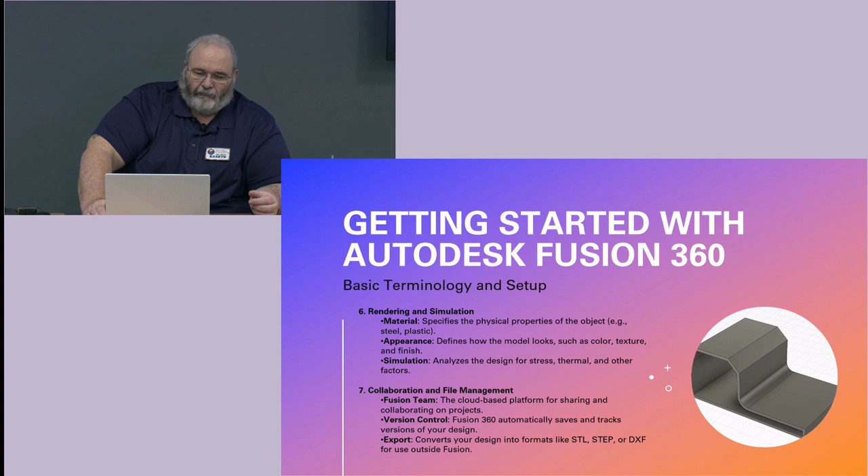Rendering and simulation, the nice thing is you can simulate different materials with Fusion and a lot of different things. You can change materials, colors, features within it. They have specific physical properties of the object for manufacturing and modeling and testing within the software.

With simulation, it'll go through and automatically analyze the design for stress, thermal, and other factors. If you have high movement parts with a friction fit, it'll give you thermal imaging of what can be done. That would be covered in an advanced class of Fusion, but it is all stuff that's possible.

Collaboration and management, Fusion team, cloud-based platform and collaboration on projects. Version control, Fusion 360 automatically saves and tracks versions of your design. That's another nice feature - if you're designing something and you lose connection or your computer goes down, it automatically saves files in a recovery folder for you.

If you open up and there was something open and it's not there, 9 out of 10 times you can go to the recovery folder and it's in there. It might be 1 or 2 steps back from what you thought you were at, but you don't lose a lot of your work, which is a good thing with cloud-based software, but also a bad thing at times.

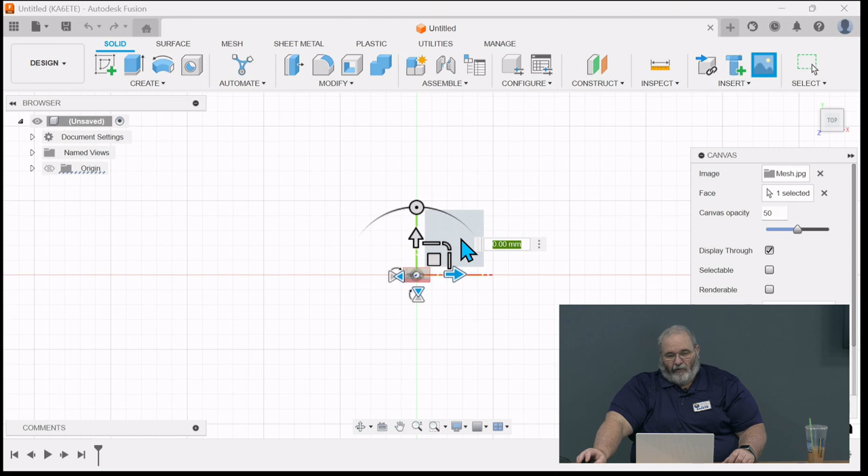A good general rule for a beginner is to always work from the top, so you familiarize yourself with what is the X plane, Y and Z plane and everything. Always try to start from the same place until you're familiar with it, then you can work from different planes a lot easier and seamlessly. So I'll select the top, and this will bring in the image, which will be a canvas.

One thing to remember, if you have half a part—say an antenna part broke and you have half of it but you want to design something simple—you can bring in an image of that part to trace the outline to get it very close to what you need, almost identical with the hole spacing.

If you do that, when you import a canvas or an image, always make sure you check the box that says selectable. If you do not check that box, it will not let you select it or scale the image to the correct size, which I'll show you here in a minute.

This image comes in a lot smaller than the actual size, which is why I always put a ruler. If I take a picture of something, I'll put a ruler next to it so I have something that gives me accurate measurements I can scale to. Seems like a horrible user interface to not make that the default, but what can I say?

The original intention was just to allow you to put images on the side, like if you're making a design that's going to go on the side of something, or if you have an image that's going to be pressed into something, to be able to put that image on there.

So I will select that, and click OK.

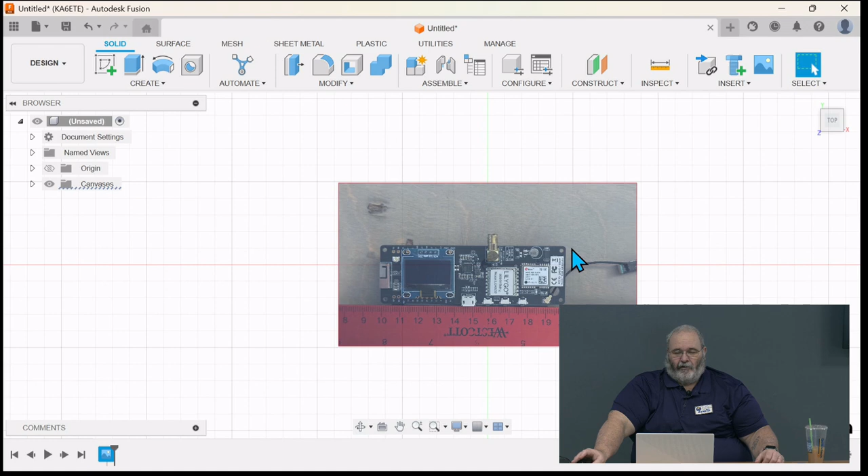Now that I have the image in there, I'll select the image and go to calibrate. Calibrate will allow you to scale the image.

Now if I zoom in on the image, you can see these are all in a metric system. So if I put the crosshair on the 15 centimeter mark and then on the 16 centimeter mark, you can see that when it imported it, it is showing 10 millimeters as 1.08 millimeters.

So then if I put in that that is a 10 millimeter measurement, it blows that image up to scale, giving me a scaled image. So whenever I draw lines and holes, they're going to be the exact same size as what is in the image.

Now that the image is in there, I'll start creating the sketch. The top left of the toolbar is always going to be your create sketch. When I click that, it'll ask me what plane I want to create my sketch on. Knowing that I selected the top plane, I'll select the top plane again to create the sketch on, so I'm looking directly down at that image.

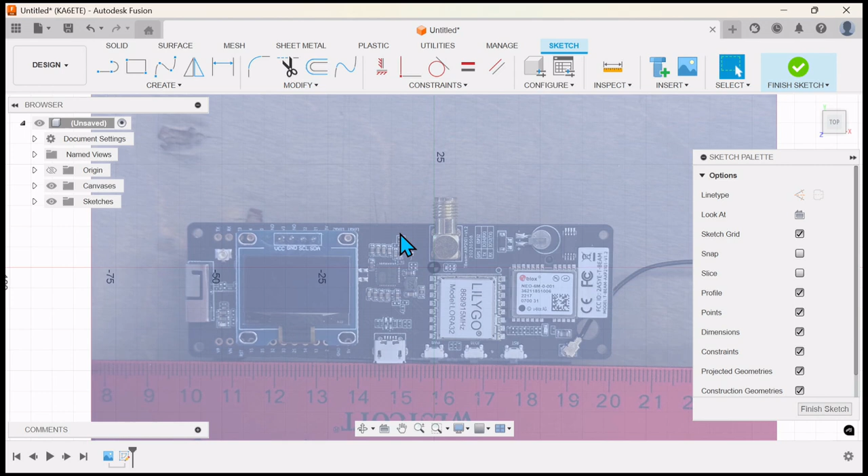So if I want to draw a line, everything you want is going to be at the top—line, rectangle, fit point spline, or mirror images. You can also select the drop-down create menu, which gives you a lot more options.

Some of these shortcut keys are standard between all installs, unless you go through and change them to custom shortcut keys. C is always going to be a center circle. L is always going to be a line. S is a shortcut key to get you to the search menu for selecting options. D is dimension, which we'll go into once we start drawing some lines.

If I go into create, I want to start creating some lines to outline this. I would always recommend going longer on your lines because you can trim off the excess, but you want to be able to do this.

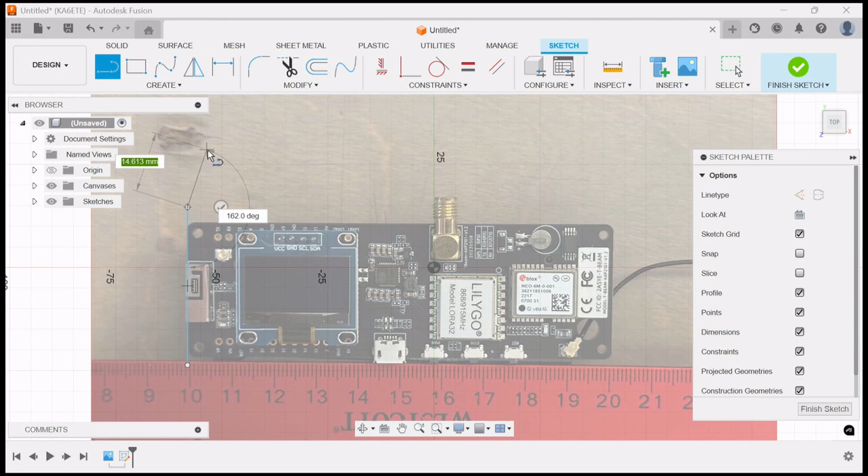So if I create a line there, the software will start creating the next line. But if you don't want to create the next line, just click the check mark, and it'll allow you to move without creating the next line. It tries creating a fixed point.

If I go down here at the bottom to get it close to that, I can start there and it'll draw past this line. The closer you're zoomed in, the more fine the movement is between it. It tries to snap it to a grid, but as you move in, it keeps making the grid smaller, so I can create a line there.

Or an easier way, I could have just created a rectangle around this, but we'll do it the hard way to go through stuff.

It looks to me like your image happens to align pretty nicely on that grid. Is that just a coincidence, or did you actually make sure that the image you started with is perfectly aligned with the axes? You can adjust it if needed.

I try and take them as square as possible with the camera. Whenever you take a picture to do something like this with, you want to make sure your picture is from directly above the image, as straight on as possible.

Yeah, the scanner works better. This picture was taken from my iPhone directly above it, which skews the image slightly, but it's good enough to where it allows you to make basic boxes and stuff. It gives you a basic outline to get within a 0.5 millimeter of what you need in the end, which if you oversize stuff for a little bit of growth and expansion, you should never make something exact size because you're going to need a little bit of wiggle room. As long as your holes line up, that's pretty much all that matters, but yes, the scanner does work better.

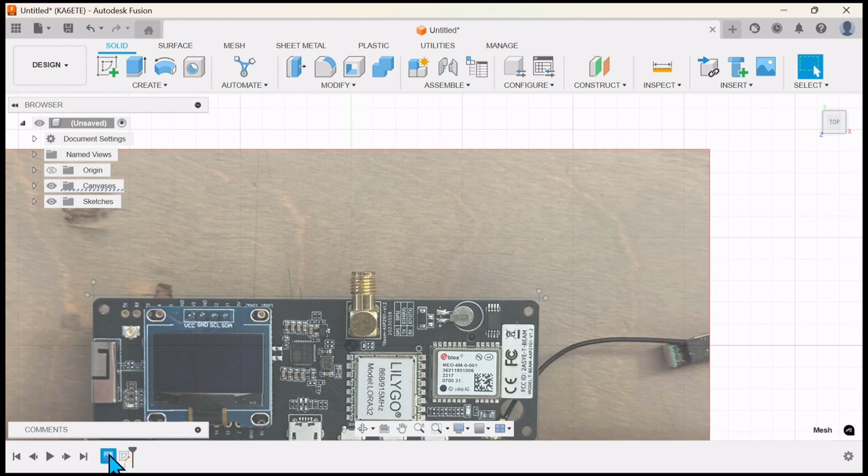But this is a good part to go back. If you look down here at the bottom of the screen, this is your timeline of features. If I go back, I can move that timeline back to where it won't show the sketch now—it'll only show the image that's there. And now if I go back to, come on, select that... that now brings the sketch back in.

Now another key feature good to remember is E is the shortcut for extrude. So if I want to extrude an object, I can select that and say, let me go up 10 millimeters on that.

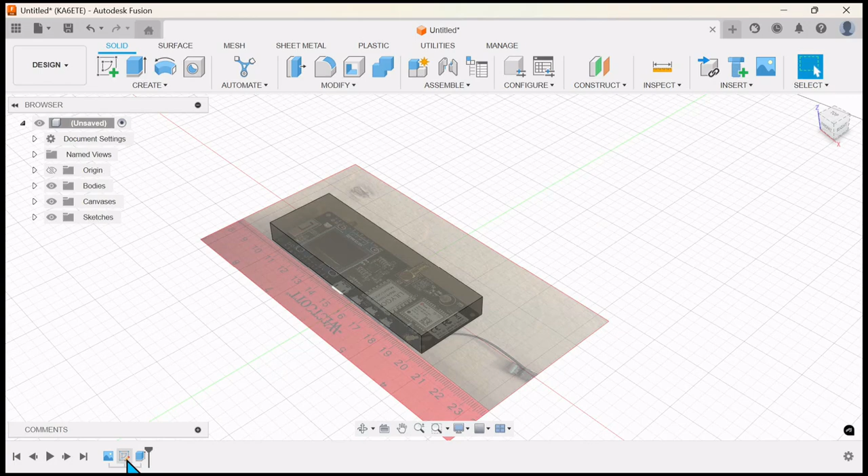Now if I go back to the timeline that I'm on right now, it shows that part extruded right there. But if I go back to the sketch, I can edit it, and it'll go back in the timeline. Now if I change anything in this sketch, like select that line and move it down there, finish sketch—see how it automatically changes the size of that box.

So if I go back and change a feature in a sketch, the nice thing with parametric modeling is you can change a feature and it automatically changes down the road.

I mean, it's snapped to the grid at 90 degrees. Yes, you could have done it with a rectangle, but by doing it with lines, you've got to be careful. So when you make your box, is it 90 degrees, or is it just because you've got the snap on that it comes out that way? Because it didn't look like you were taking a lot of time when you placed the lines—it was just kind of at the edge.

Yeah, a lot of it—whenever dealing with stuff this small, you want to try and get it close to that perfect 90-degree angle, which isn't always going to happen, especially when you're tracing the outline of an object. If I go in and check the angles, one angle might be 90.2 degrees and another might be 88.9 degrees. That 1 degree difference isn't going to be the end of the world in the end design.

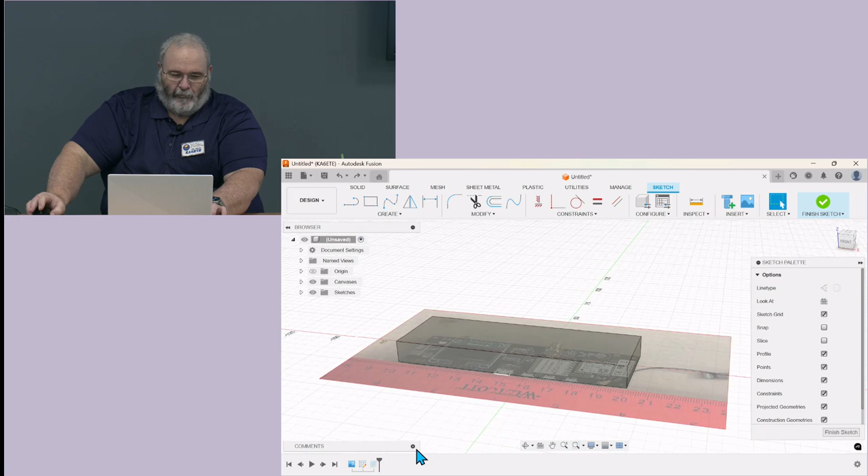Let me go back again to remove the extrusion. Now let me draw a circle here to show what I was doing earlier, and say I need to put a 3mm screw hole there. Remembering that D is dimension, which gives me my constraint, I can click that line and that line. Right now the center point is 2.5323 millimeters from the center of the circle to that right-hand side. Let me move that to 5mm—it automatically moves 5mm away from that line. I can do that one too, it's at 3.1, let me move that to 5mm also. So now I'm 5mm from there and there. But now that line moved, because I did not have that line constrained into the drawing.

So now if I try to extrude that, it won't let me because that's not constrained there, and now that's not a closed design, it's an open design. If I try to extrude here, the only thing it'll let me extrude is that center circle, because that's the only closed part. But I can select that and draw it out there. Now that's finished, and I can extrude that while leaving that hole there.

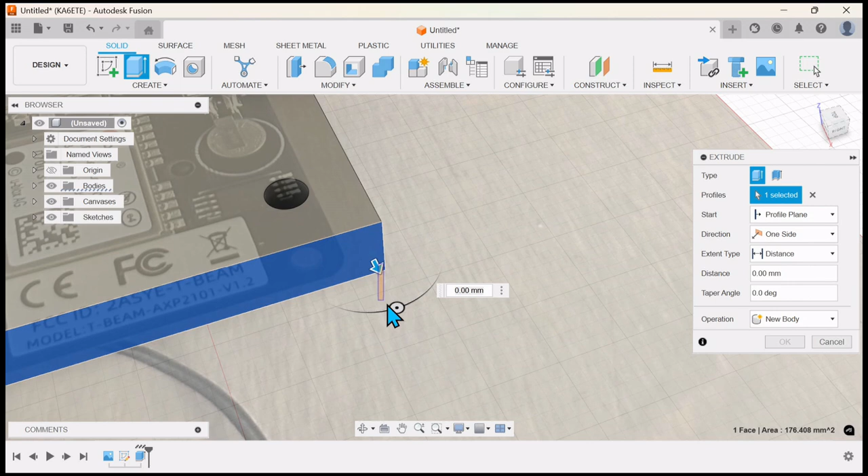Let me go 5mm on that—now you notice the hole's there. But now if I want to extrude this out further with that hole locked in right there... right now because that changed stuff, so I screwed that up. I should have had the box constrained. But it's all learning.

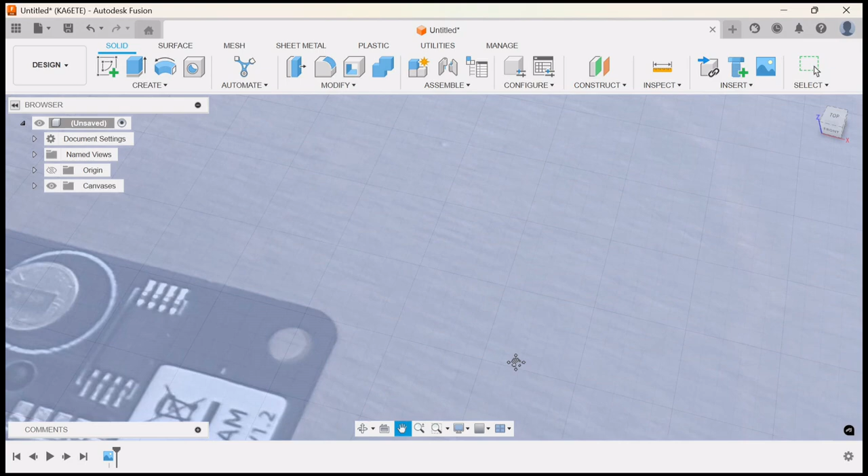Okay, that didn't have there. I'll just go back and start over, delete features, and redo this. I'll show you what Mark was talking about, using a rectangle instead of doing each line. Let me redo the sketch.

So now if I want to do a sketch, this shows different options. You can do a 2-point rectangle, a center-point rectangle, or a 3-point rectangle, which allows you to select 3 different points for where you want the rectangle to be. A lot of times I'll just do a standard 2-point rectangle—it's easy enough. I'd start at the bottom and then come up to figure that point at the top.

It gives me that dimension there, and if you notice, because of the shift with the camera image, you can see down here I'm right on the line, but up there it's slightly off. So that should have been slightly bigger than what I made it, but this side kind of makes up for it because it's shifted the other direction—which is another reason the scanner is optimal, because it takes direct measurements from a fixed point versus an image.

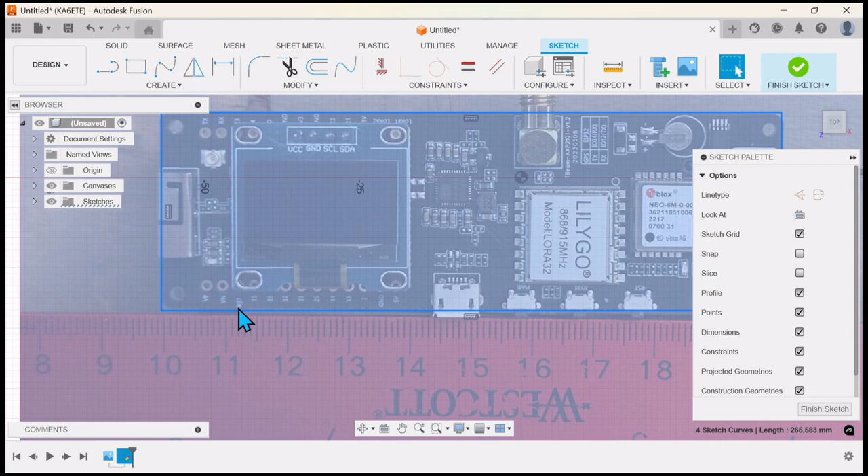Another thing to pay attention to: if you use a camera with an image and a ruler like this, make sure your ruler is at the same level as the portion you're going to be outlining. For example, if the ruler is up at the level of the circuit board, even though that's an inch off the surface, I had to lift the ruler up, because if I'd left the ruler an inch down, due to the skew difference, it would have looked like the circuit board portion was about 110 to 115 millimeters versus 100 millimeters.

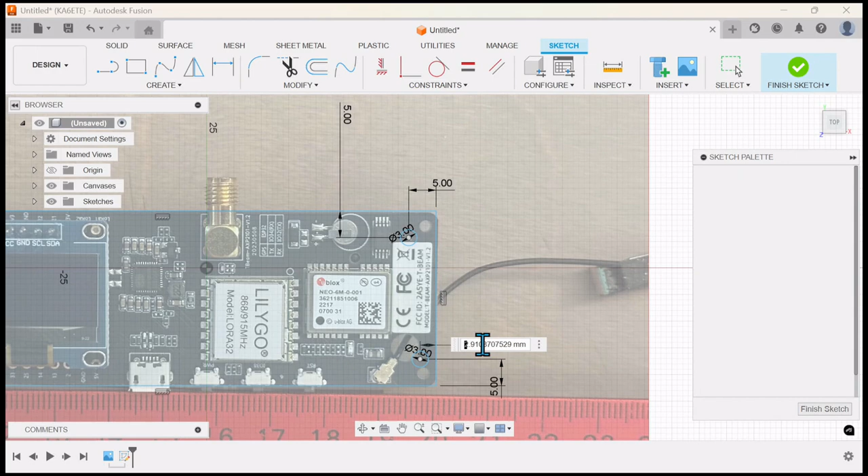Now if I go through and put a circle in here, dimension that from the side at 5 millimeters, even though it's not that, 5 millimeters is just a good round number to use. From the side and that side, I'll put another one down here.

And both of them are moved in from there. Now with them locked to each side, if I was to extrude this portion, you'll notice each one's perfectly spaced from the side. But if I move this, extrude this side out, notice only that hole is moving with it, not this one, because they're locked to separate sides.

So that would change the dimensions for the circuit board to fit on there.

So why aren't you on top of those holes? You've moved them in a little. I guess I would think if you're going to design something, you'd have the holes kind of match your part, or is this just for an example?

Yeah, I just did that to give it a little bit more room for demonstration, because those holes are actually 2.5 millimeter on center from the edge. It puts it close to a nice easy number for demonstration purposes. But normally you'd want to put the holes directly over the hole that's in the image that's there.

But because this hole was locked into these two dimensions between this side and this end, this hole moves with it, while this one stays in place because it's locked in from the other side.

Now, whenever I make something that I want to remain the same hole-wise, if I wanted the circuit board to be able to be mounted in there and all the holes move with each dimension, I would have initially constrained one hole to these two corners. Then the second hole, if I would have constrained it to this outside end and the center point of this hole, it will move along with that hole.

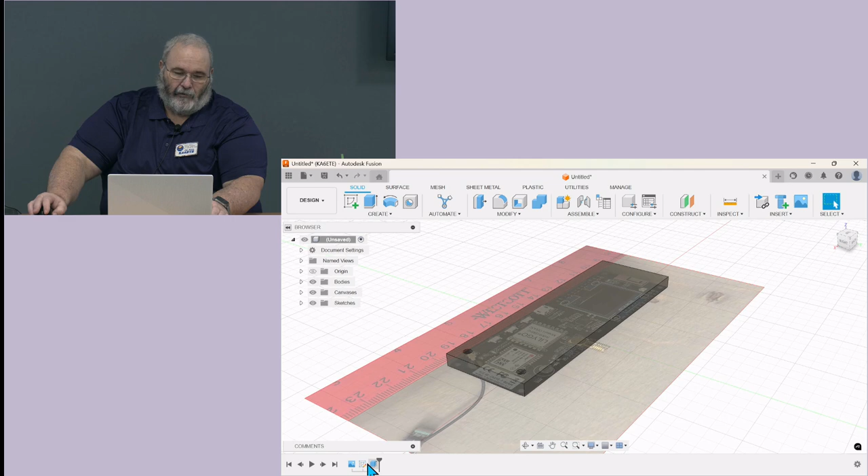To where now if I go back, cancel that, go back to edit my sketch. So now if you look, because see how they're dimensioned on different sides, if I remove that constraint, and now if I dimension that and go from there, from there to there.

Constrain that there. Now if I move this, do that same thing to this hole, now both of the holes are moving to where it'll stay there. So if I lock them together, if those were directly above the holes, I can move that entire circuit board along with it while having all this excess over there.

Or vice versa, I could do it to the other side, to where if I leave that there, now even if I move this wall dimension here, those holes are going to move and stay right there in that corner. But if I was to come over here and do that, the holes stay in place because they're constrained to that other corner.

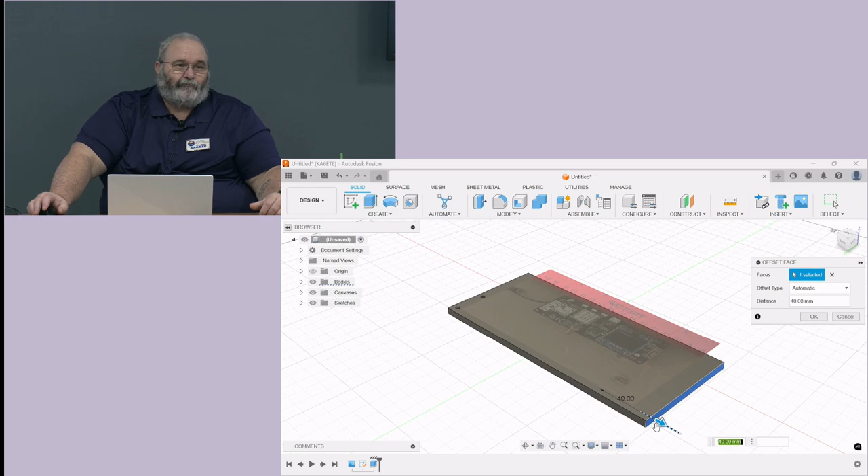So you went through this awfully fast. It's kind of like when I do Vim and somebody says, 'What did you just do?' And I say, I don't know, my fingers remembered what to do, but I couldn't explain it. Could you go over what exactly the series of keystrokes are that you used to enable the constraints? Yeah, that's my fault for knowing the shortcuts and remembering them.

I'll back out of that. Finish sketch, Control Z. Get back here. To do the constraints and stuff like that, let me move this up to where we can see it.

We'll make Mark happy because I'll put in the dimensions that I know these are. When I first drew the circle there, you can pretty much draw it anywhere. I know the dimensions on this circuit board, it's a 2.5 millimeter hole. So I can draw the hole anywhere I want and then constrain it after the fact.

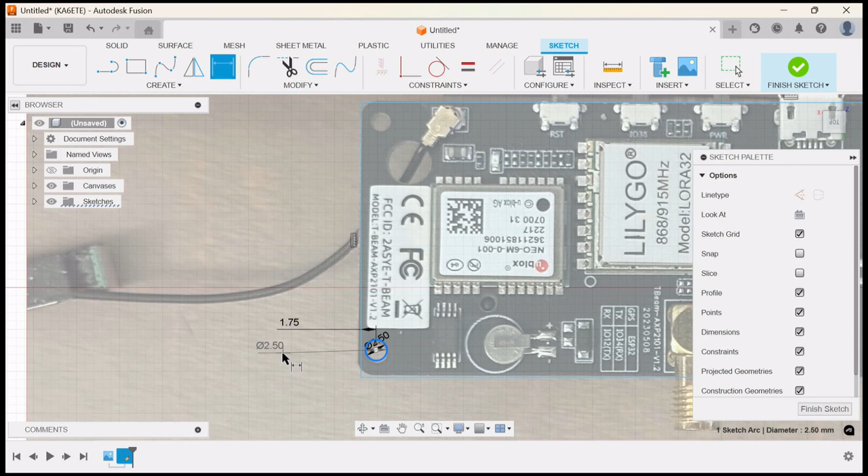If I want to lock it into the corner, I can select the circle again. I'm still in the dimension tool, which is quick key D or hotkey D. Select the other line that I want to constrain it to. Then with it hidden there, if I pull off to the side and click the mouse button again, it shows you the dimensions from that line. So then I can enter the 1.75 millimeters from that side. It automatically moves the line to that corner.

But because of the skewing of the image, you can see that it actually looks further away from the hole than it is. That's why it's always good to have backup measurements. If you're doing this, it will give you a rough estimate so you can look at it and say, okay, well, I have my SMA connector there, I've got to make sure I have an opening in the wall for the SMA connector. It's a good reference point for dimensioning stuff. It doesn't give you accuracy.

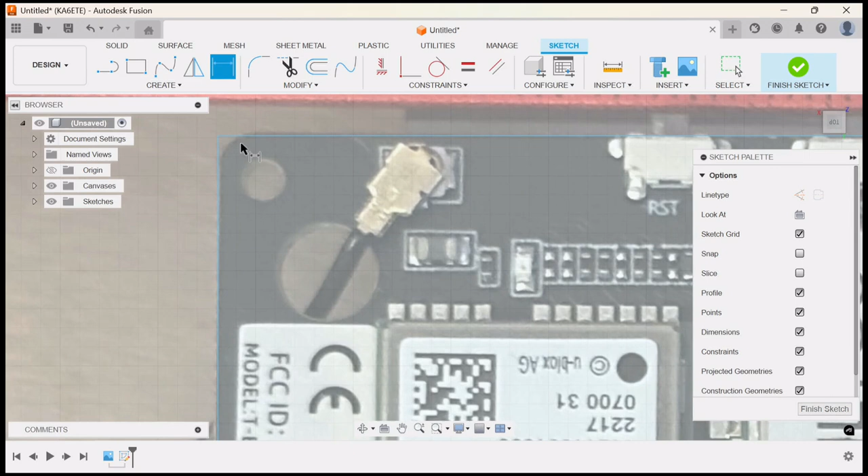It's just for reference to know what parts go where and what you need to allow for. So now that I know that circle's constrained there, if I want to add another circle up here in the top corner - when I'm moving in and out, it's just scrolling the mouse, and depending on where your cursor is, that changes the direction it zooms or moves away from the image. So if I scroll up there, now add another circle. As soon as I press C, it gives me a center diameter circle.

You can kind of do a copy and paste from the other one, but it's not copy and paste - it's move and copy. I'll show that here in a second. So if I do this, I'll enter the 2.5 millimeter circle there, constrain this one, and then we'll do the move and copy, and I'll show you how to do that.

So make it 2.5 millimeters, go back into dimensioning, and I want to leave this the same distance from this side over here as my first constraint, which is 1.75, so it keeps it the same as the other. Enter, and now I want to constrain this to the other hole so that stays the same dimension down the road. So if I go there, constrain that there, that ends up at whatever it ends up because of the dimensions of everything else. Don't change that unless you know the exact dimension it's supposed to be. Generally, I'm guessing that would be 28.7 millimeters - it's just due to accuracy and all the decimal places that we don't care about.

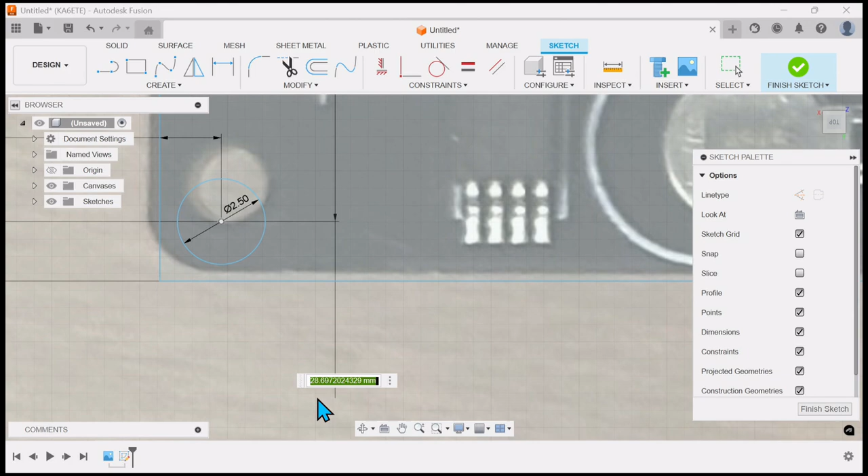So now I know that circle is locked there. Now to go from what Mark was saying about copy and move - if I highlight that one, let me get out of the dimensioning tool. Anytime you need to get out of a tool and just go to the cursor, escape key is the quick key, or you can go up to the top and hit select, which changes it to the standard cursor. So let me select that circle, and if I push shift, it'll allow me to select multiple features.

Now that I have both of them selected, I can right click on the mouse and do move copy. It'll pull up this other window, which is for moving the holes, but it wouldn't really allow me because they're constrained, so it will just leave them there and won't allow me to move them. But I can check the box to create a copy. Then if I go up to the arrows, which makes it nice and easy, it'll allow me to slide them over wherever I want.

What's nice is if I know the dimension that goes between that side and that side, I can enter the X distance, because that's moving those two circles or copying them along the X axis. So it'll allow me to do that, which I'm guessing is going to be negative 96, because that's the direction I'm moving - oh, not negative 96, so we'll do 95.5 millimeters.

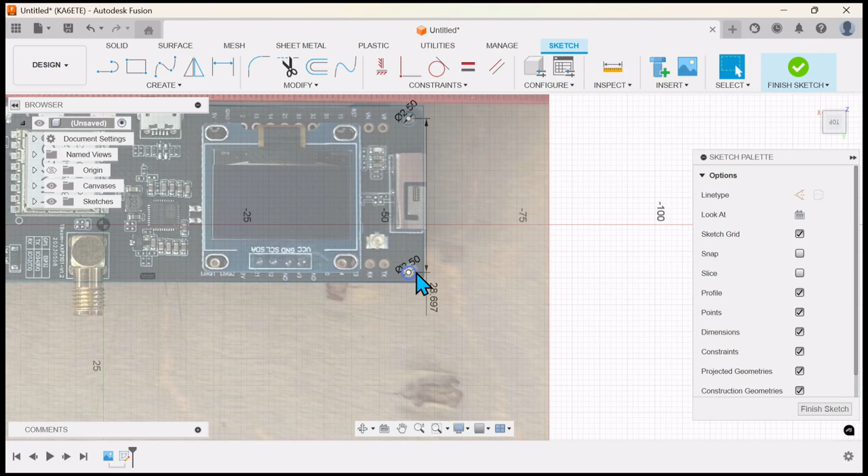Negative 95.5, that looks like it's really close to what I needed. Now knowing that is there, if you look, this hole is already constrained the distance from that hole.

Or that circle is constrained between there, so that's going to be locked in. But if I want to constrain this to that side, I would select dimension, and then constrain it to that circle, which gives me the 95.5. So that's constrained between that circle and that circle. To go one step further, I can still constrain that between there and there, which should automatically be at 1.75 because I just copied and moved it straight across the x-axis.

Now what's nice, if I finish the sketch and extrude that up 10 millimeters, it puts all of the holes directly above.

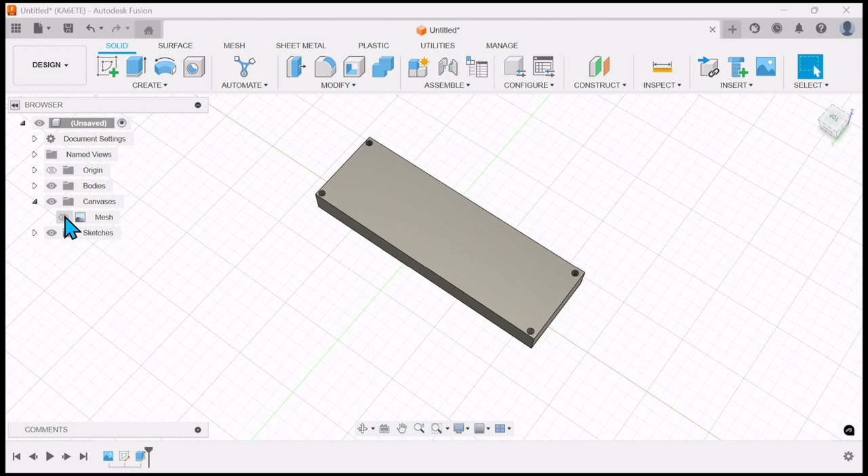If you ever want to change the opacity of the image behind it, once you're done with it, you can go over to the canvas on the left side, the toolbar object window, and hide it there if you want, or just change the opacity down at the bottom.

Or right click on the image, or go to the timeline window and right click on that, go to edit canvas opacity, cut that back to 25% so now it's not as prominent. Or if you want a solid image, move it to 100%. When I generally start the rough outline, I leave it at 50%, and then back it off as I move along to hide it in the background more.

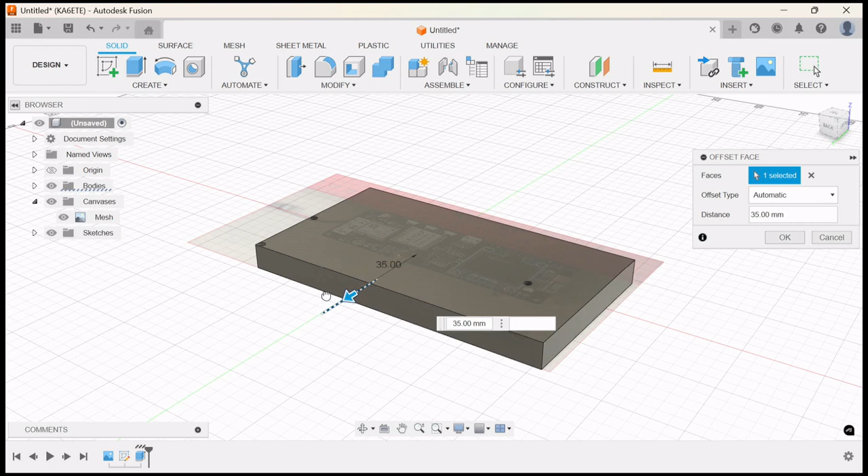Right now this is a solid piece, so if I go through and extrude that side, none of those holes move. I can change the dimensions on that side, and all 4 of the holes move, so no matter what, all those holes remain the exact same spacing, while I can change the location of the circuit board.

This gives me all this other room over here if I needed it, if I'm making something for one of the T-Beam circuit boards, and want to add other objects to a single enclosure with the T-Beam. You can put the layout for the T-Beam to mount on there, and then expand it so you have room to add another controller, like another ESP32 controller, or add room within the same structure for anything else, while not changing the dimensions for the mounting capability of the original object.

When you're starting out with this stuff, I was really tempted to go crazy with dimensions and constraints and make sure everything was locked in. But I think it's important to consider which dimensions actually matter, so you have this flexibility to change things later on. Because if you have 5 millimeters here, 28 millimeters here, 5 millimeters here, you can no longer change anything. Everything's locked in.

The basic features: if you're making something for a circuit board or one part, leave one primary object that you're constraining, and leave the rest open to the ability to change. Like this, I'm making a box for this controller, and I want to be able to add different things like a display. So I lock in where the controller or the circuit board is going, locking the mounting holes in for that.

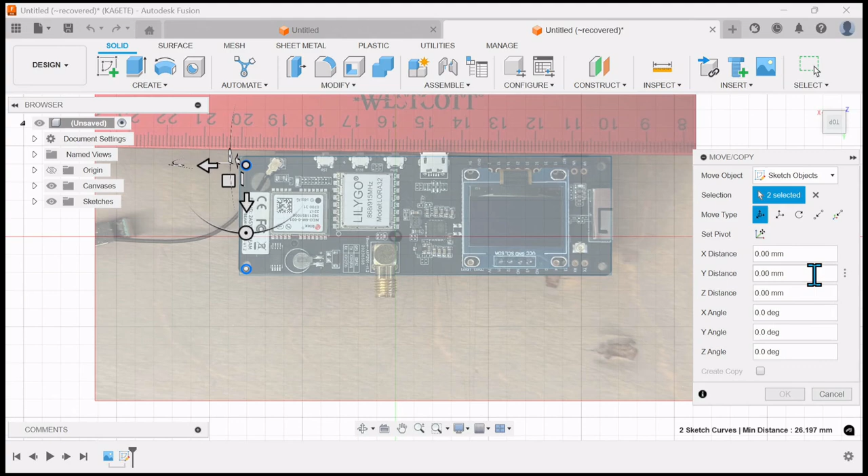People remember how we did that: shift key, select multiple, right click, move, copy. No, I don't want 3. Why did 2 get selected? What is going on here? Oh, that's why, I wasn't in the sketch, which is why it won't let me do that. Go back, edit sketch.

Copy. No, because I remembered what it was. I can just enter negative 95.5 millimeters and automatically move them the distance I want. Now reconstrain, make sure everything stays in the same spot.

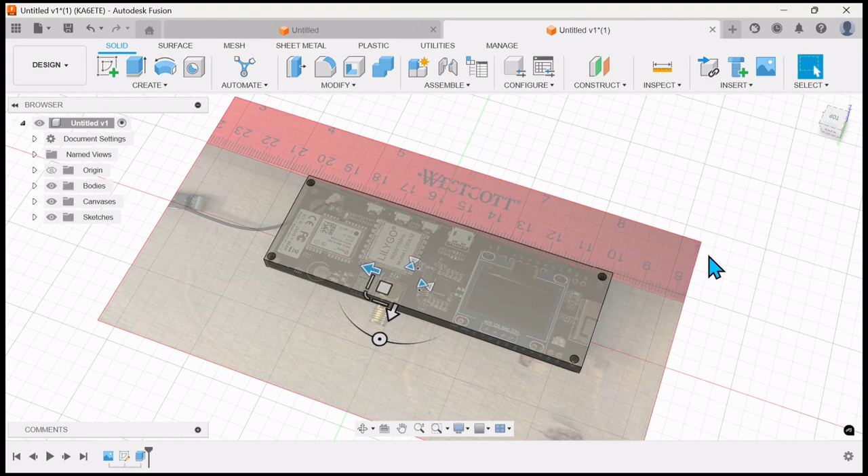Change the opacity of that back to where it was. So now that I have everything reconstrained and back where I was, I'm trying to remember what someone asked me during the break about a portion of it.

Now if I move this out to change that dimension, change this dimension here where all 4 holes come out. Now if I want to add something - a hole or an inset for another feature on this side, or if I just want to slightly change this to add standoffs for the circuit board to sit on top of these holes - if I want to add a new sketch on top of this feature, I highlight the feature and I can create a new sketch.

That means I'm sketching on top of that extrusion, so anything I add to it is going to be added to the top, not underneath it. So say if I wanted to add, because we know the holes on the circuit board were 2.5 millimeters, I want to add an offset to it so they sit up above the solid form underneath it.

I select the circle that I want, and you can either select at the top up here, offset, which will create your own offset, whatever size you want. Or if I hit the shortcut - this will give you another way to get to a lot of the features if you don't remember where they are - press S for sketch shortcuts or search. If it's not on the shortcuts up there, if I start typing offset, it automatically brings up standard offset, offset face, or offset plane. I just want a regular offset, so I select regular offset.

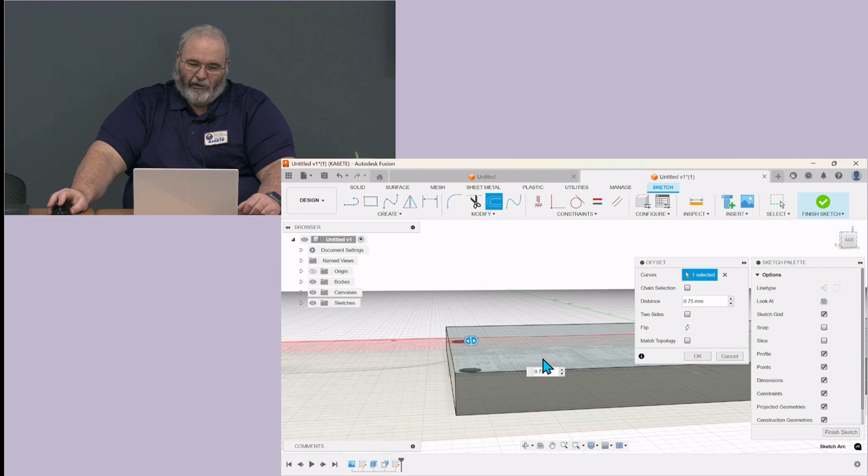I'll leave it at 0.75 millimeter and show you what it does. If you look at the offset, see how part of that feature is off of the side. I'll finish the sketch real quick, but if I select that, it only selects that portion of it because there's technically a line running through that, so it's giving you two separate closed features.

Or if I select that and go to extrude that, say I'll go up 3 millimeters, it automatically cuts it off right on the edge.

It's not going to allow it to go past that. Now if I go back and select that and extrude it, but I also want to extrude that 3 millimeters, it gives me the whole thing, but then it overhangs there.

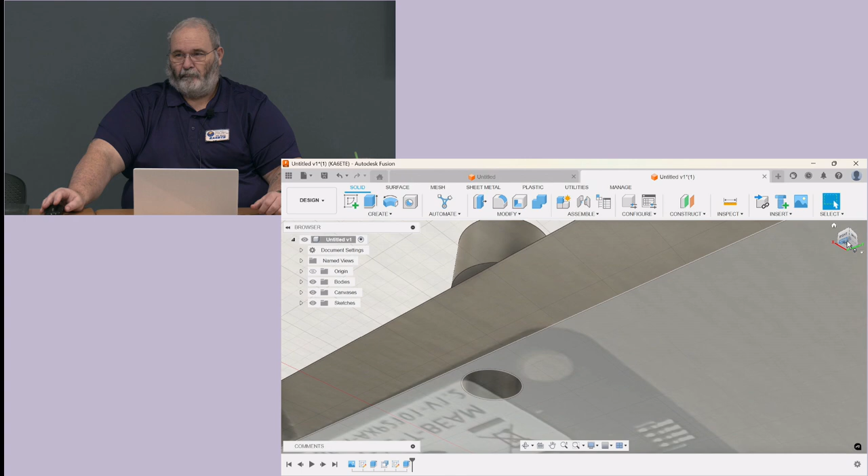If you do want to do that, there's ways you can add structural rigidity by adding a fillet to the underside of it. If you go to 3D print this, that's so small of an overhang that most 3D printers will do it without an issue. But if it was more like a 2 or 3 millimeter overhang, you can't print in free space. You can try as much as you want, but you're never going to do it.

They are working on ways you can do it with UV curing and laser curing with resins to print in free space, but I don't think any of us here have the money to have anything to do with that.

I'll leave that there for now. If I wanted to add a fillet to it, the quick key for that is F. Shocking, most of the quick keys are the first letter of what you want to do, with some exceptions, like S being the short key for the search menu instead of sketch, or the C key being circle instead of chamfer. But if I want to do a fillet on that, a 1 millimeter fillet's too much because that's only 0.25 millimeters of an overhang.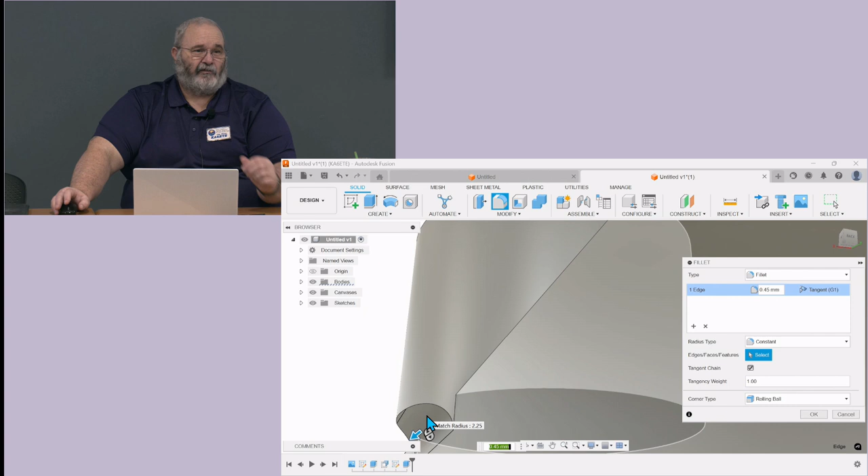So 0.45, that would be printable by any 3D printer without any type of support material, because you're starting off gradually tapering out to that. By the time you get out to this, that's less than a line width for your 3D printer, so you're going to be able to print that very easily.

I know my 3D printers are calibrated to where I can print a 65-degree overhang without any support structure, which most people try and average. You can get a 55-degree overhang without support material, you're on the upper side of things.

I'll go back and cancel that. I'm going to go back to draw the rest of the diameters around that. So I could do it multiple ways.

If I select offset to do an offset on everything, again quick key O, I can go through and select... no, offset won't let me do everything, but I know I'm just doing everything in 1 millimeter. Makes it quick because I can go through and select everything, press O, default is 1 millimeter. So just select it, press O, then offset or enter, automatically puts everything at 1 millimeter.

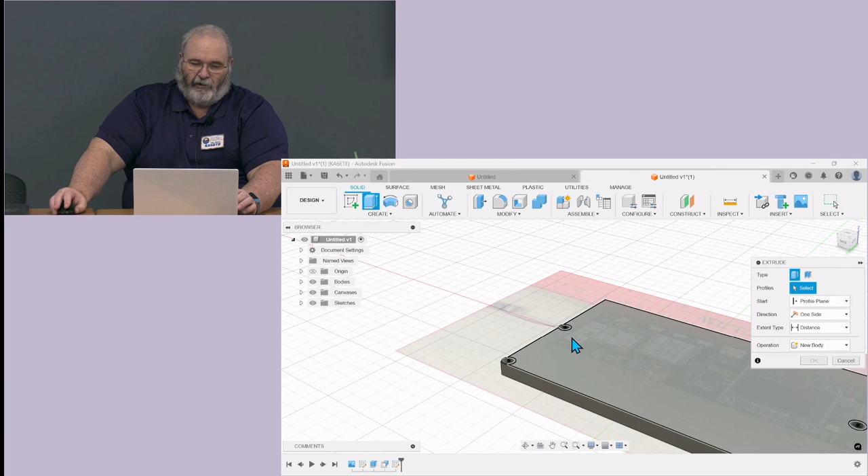Now if I want to extrude everything from that point to make these standoffs, it'll allow you to select multiple features simultaneously, and you can tell by each one remaining highlighted as a feature.

So each one's highlighted. These corners will show you, you can see how on both sides, the overhang is not going to extrude. If I wanted them to extrude, I could go through and select them individually. But because of the box, it's going to be inserted into something, I don't want them to extrude.

Extrude everything, don't need 5, so we'll go 3 millimeters. That puts everything up to where now the circuit board is going to sit on top of that and still have the bolt holes, or screw holes, for the screws to go through to mount it. While giving me the air gap underneath, whether it's for features underneath, solder through connectors, or heat sinks or anything mounted underneath, they're going to have an air gap for cooling purposes.

Now if I want to add to that feature, even though I extruded them, I can go back and edit that sketch by going down to the timeline, right clicking on the feature. The sketches are going to be highlighted by a box with what looks like a pencil for your sketches. Extrusions are going to be the blue rectangle with the arrow pointed up, defining extrusion.

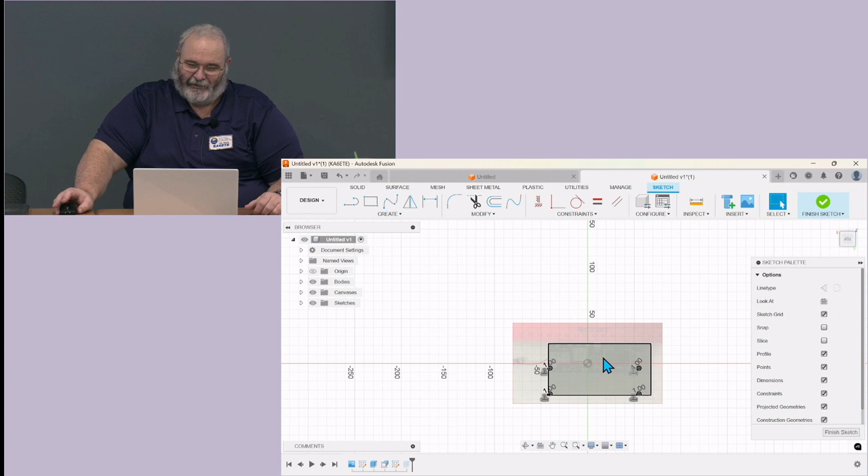The canvas is going to be the standard picture image that's been used since, I think, 1995, whenever you depict an image that's not there. Hasn't changed much. So now I can go through and edit the image.

Now anything I put on here, I'm going to put a rectangle on there. What's nice is if I start drawing a rectangle, you can see the dimension boxes. Say I need a 50 millimeter by 15 millimeter rectangle. I know the dimensions, so I can directly input them and it'll put it in there.

Say this is going to be for a small battery power supply for the circuit board, like an 18650 battery that's mounted there that I always want to be in the exact same spot from where that circuit board is mounted. You can constrain it there if you want, or just hope you don't change the dimensions that move the box.

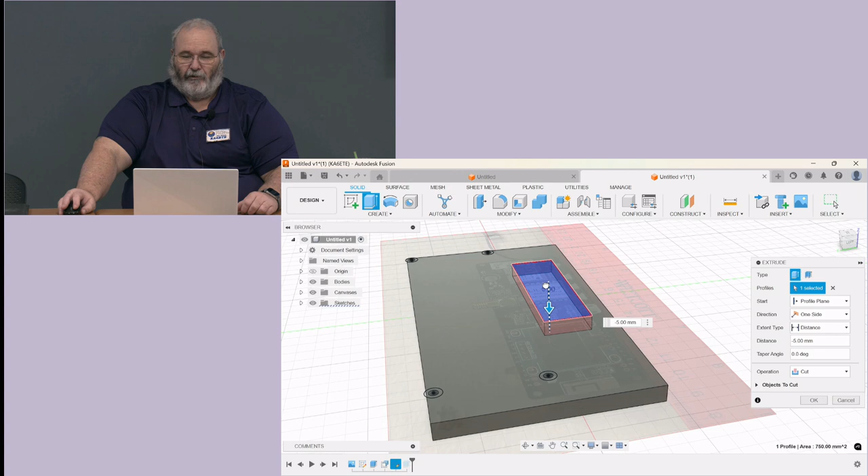Now with that extrusion there, if I select it, I can go up to make it higher, or if I go to a negative number, it'll cut into the box below it. Or say if I go negative 5 millimeters, that puts a nice indent for a battery. If you have a battery box, it's going to sit there, so keep it from sliding around.

Now with that box not being constrained, if I go to move that, oh, now everything is tied to that spot because I made a new drawing on top of that. So it won't let you go back. So now that I added features on top of that, it doesn't let you move stuff underneath it.

Now everything is exactly where it's supposed to be. I can move features to the sides, add more room here. If I want to make that bigger, to add another display section.

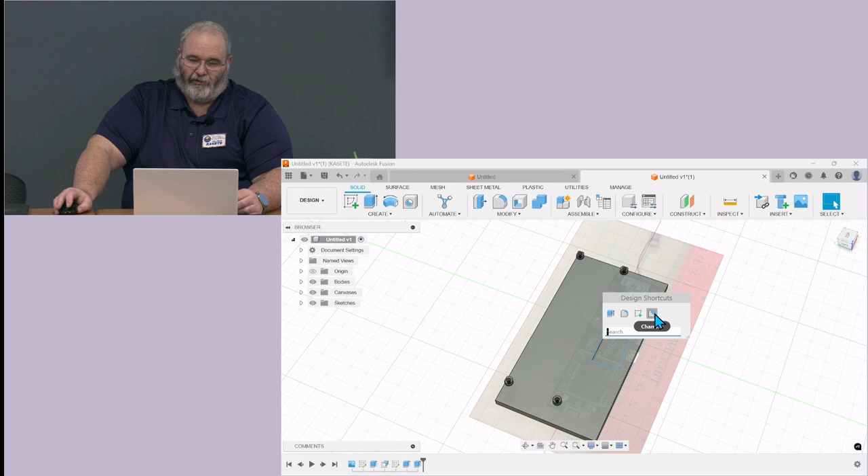The key to be able to do it efficiently and quickly is to learn the hotkeys for stuff. That will be the biggest aspect to help you. With the S key as a shortcut, you can add stuff into this, and you can take stuff out of this. Like right now, it has the chamfer, create sketch, fillet, and extrude.

If I wanted to add the offset feature up there, it's a quick button. If you look here, if I start typing offset and press the up arrow next to it, it adds offset to that list. So it's a quick way to make a short list of features that you use a lot instead of having to go up here, go to modify, shell, draft, whatever you use the most.

Now if I was to do this, let me create a new sketch. I'll go over here, hide that body, hide the canvas so that's out of the way. Hide the sketch, just to start new and fresh without opening up a new thing.

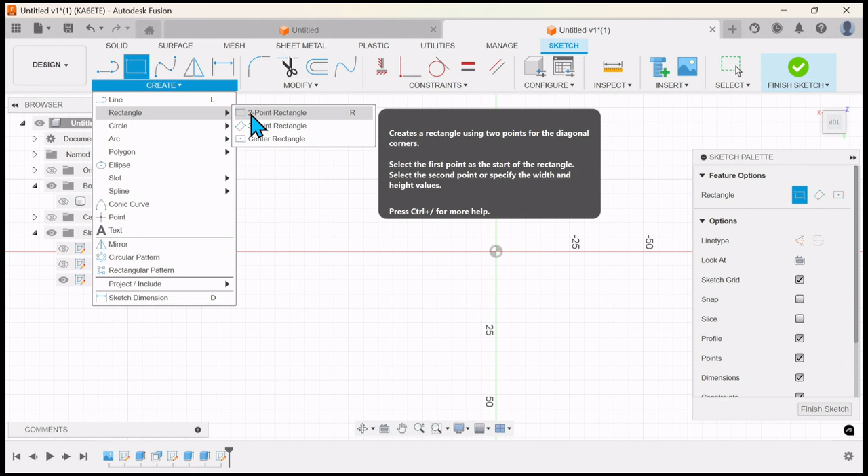If I want to create a box that's constrained in to the center of all three axes, I go to center point rectangle. It automatically pulls out from the center point where I can do a 50 millimeter by 50 millimeter box. Extrude that 50 millimeters.

Now we have a perfect cube, but I want to make it a shell to where it'll only have 5 sides. If I select that and select shell, this is asking me one face selected, the inside thickness, asking you what you want the shell thickness to be.

It's just moving it inside. If I want it to move outside, I can select 1 millimeter. That'll move the 1 millimeter wall thickness to the outside dimension, leaving it a perfect 50 millimeter by 50 millimeter cube inside. If I move it to the inside, you're going to end up 48 millimeter by 49 millimeter because you're removing one of the faces, so it's not going to be a perfect cube.

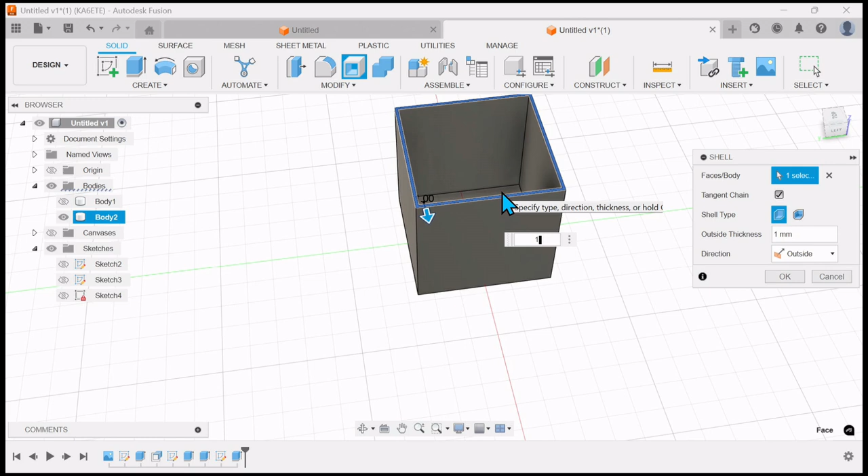You can also move it both directions to where it makes it a 2 millimeter wide shell thickness, but you're moving 1 millimeter inside, 1 millimeter outside.

Which, if you're making small cases to slide stuff into, say you're putting a piece of test equipment in and you have a nice box that it sits in, foam in the box, but you want a hard shell to slide over top of it for transporting. Making a shell with a thickness of 2 millimeters is going to give you a nice hard structural surface. If you throw it in your backpack or tool bag, it's not going to get damaged on the inside of that box. It's protected by the foam or whatever it's setting into, along with the hard structure around it.

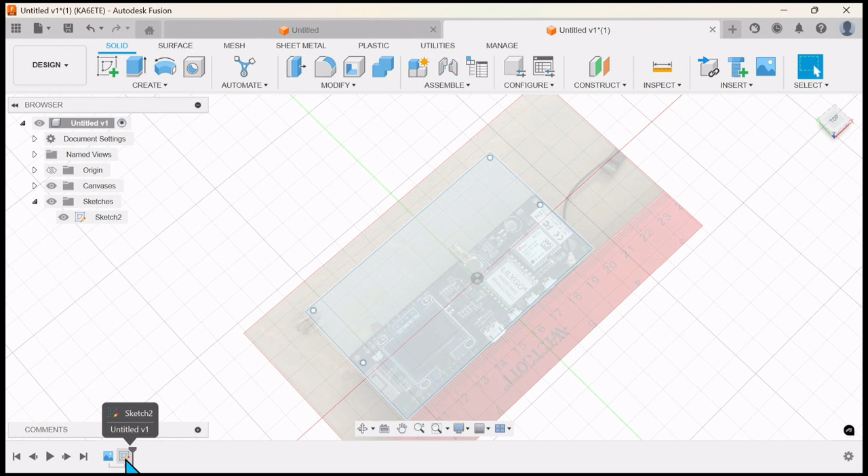For that Meshtastic design you were working on, if you need to make a hole for that SMA connector to go through the side of the box—you haven't added sides yet—how would you go about making sure that SMA connector is a nice tight fit, but still aligns with all the screw holes? It looked like you were playing a little loose and fast with the actual placement of the board on the sketch. So once you get to that SMA, how are you going to make sure it's still a snug fit so that you can mount the board?

Okay, let's add some sides to the box real quick, just to make it a little bit easier. Here's an easy way to add sides if I want to do all sides the same.

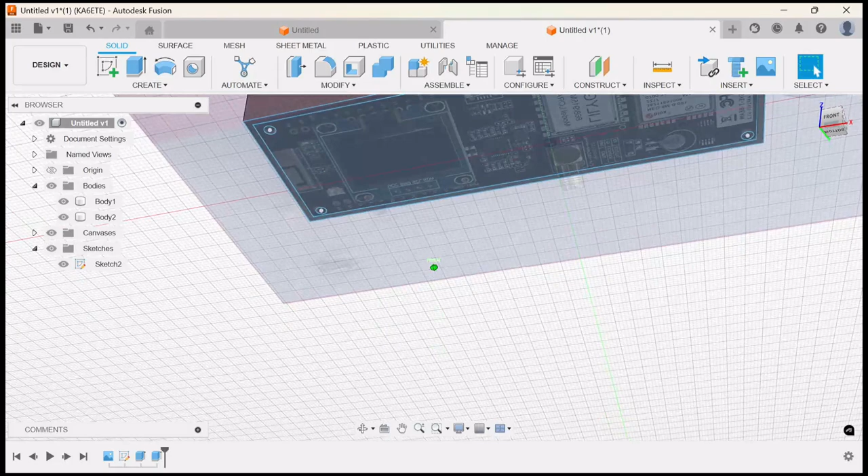Offset. Now if I'm editing the sketch, I can offset it. We'll do 1.5 millimeter sides to the outside on the offset. And now if I go to extrude—because I know the original box went up 3 millimeters—we'll say 10 millimeters there. And the sketch is finished. Now we know that everything is done there.

Because of opacity levels, you can still see through everything, and knowing that the SMA connector goes right there, I can zoom in and see that goes right there.

I don't have the exact dimensions, so otherwise I would measure. If I had the part in front of me, I could use a caliper and measure how far over the part needs to go. But because we're going to be guessing on where the SMA connector comes out—not really guessing, because we have an image—we're going to be close. But I'll need to...

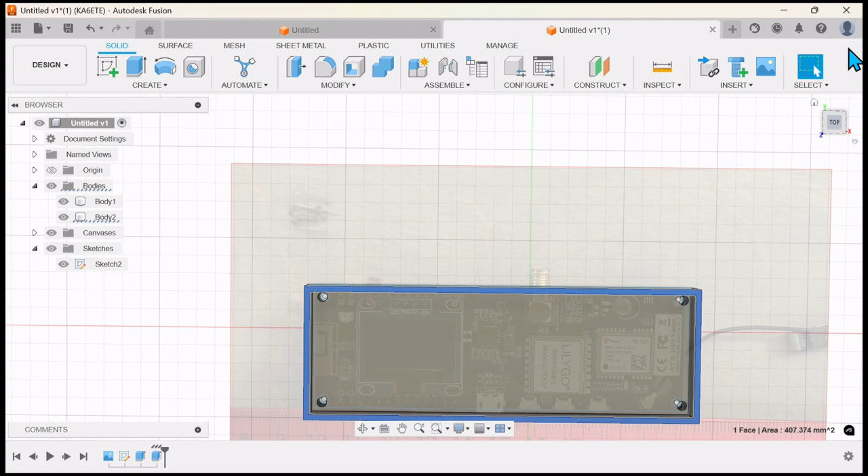Okay, so now, similar to how I added the recess portion, if I click on this upper ring, it'll allow me to add a sketch there, to where anything I draw is going to be on that upper ring, which will allow me to add slots or voids and anything I want into the top to allow for different features to come through it.

The downside to stuff like this is the SMA connector's there, so I could just put a small hole in the side for the SMA connector to protrude through. But then I have to deal with the buttons on this side, as well as the micro USB connector for the power supply.

You've got to decide which one you want to be a slot and which one you want to be a small hole, holes to allow them to go in, because you're going to have to put it in on an angle. With this needing a top, I would choose to do a slot for the SMA connector to go through, and then you can always add a small extrusion to the top when it goes on to fill in the top portion of that hole. So it's kind of a two-part approach to make it a single opening.

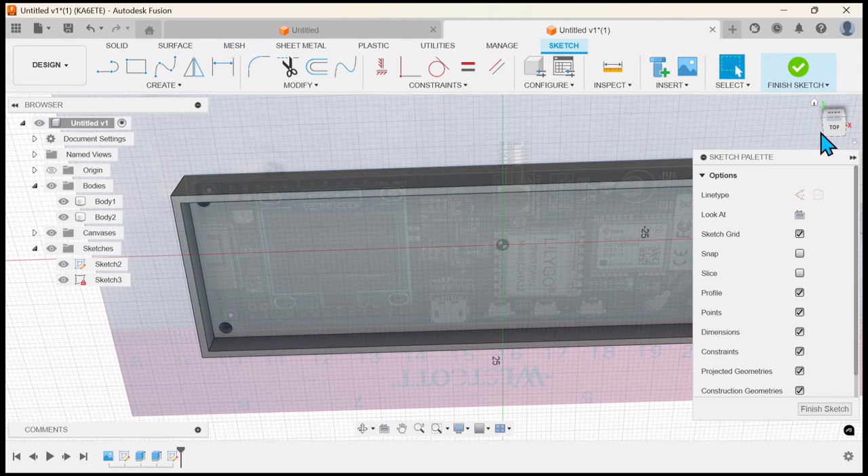So I would start at the top here. We'll do this feature first, and then I can select just the line feature at the top, or by pressing L. Because I know this is going to be close here, and with the thickness of that, I'm going to have to allow room for the hex head of the other part of the SMA to thread into, because it's going to be recessed into that slot a little bit.

And whenever you're drawing lines that are attached to a feature, you can see how whenever I move the mouse, it turns into a blue X. That means I am on that line. So if I start my point from there, it's going to be attached to that line.

And now, another nice feature—if I want this to go in on a taper, I can define what I want that taper to be, either by doing this to where it highlights the blue X, meaning I'm at the other side of that feature, or say if I want this to be exactly 120 degrees.

Oh wait, I did that backwards. Let me escape out of that. I accidentally hit 120 millimeter for the line length, which we do not want.

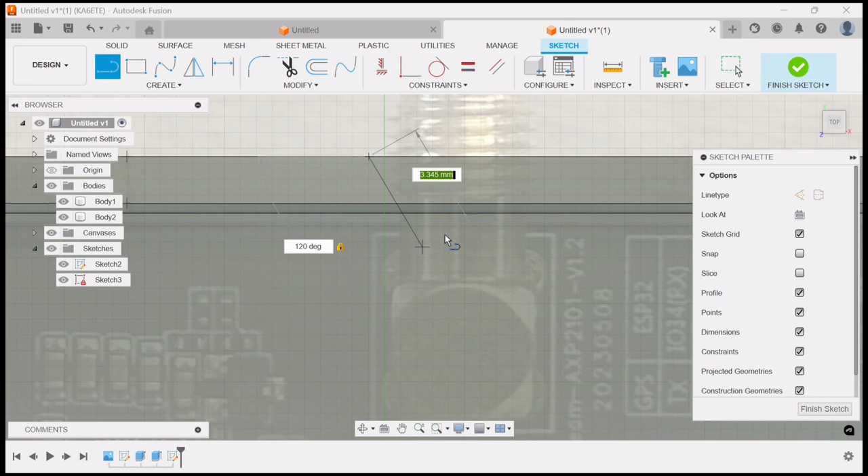So if I go down to go between the line length and the degree that it's at, there's just a tab button, similar to any other program, to go between boxes. If I want that to be a 120 degree angle, now no matter what, I can't move that line from 120 degrees. I can go up to where it hits that.

That tells me the line length is 3.345 millimeters. I know that's exactly 120 degrees. Now if I go to the other side, I can do the same thing, which will allow, obviously the spacing is going to be off a little bit, but that would allow, if I wanted a perfectly sealed box, to put a taper in there with a rubber O-ring, to where whenever I screw the SMA in, it's going to hit that, as long as I have the dimensions right, and create a seal on the box.

I could do the same thing on this side, to where if I do a 120 degree angle, it's not going to let me change the angle, just the length of the line, to where I can do the same thing on that side.

Delete that line. We'll go through here, just put straight lines across, 90 degree angles. Finish that sketch, because that's going to be the only hole that's going through.

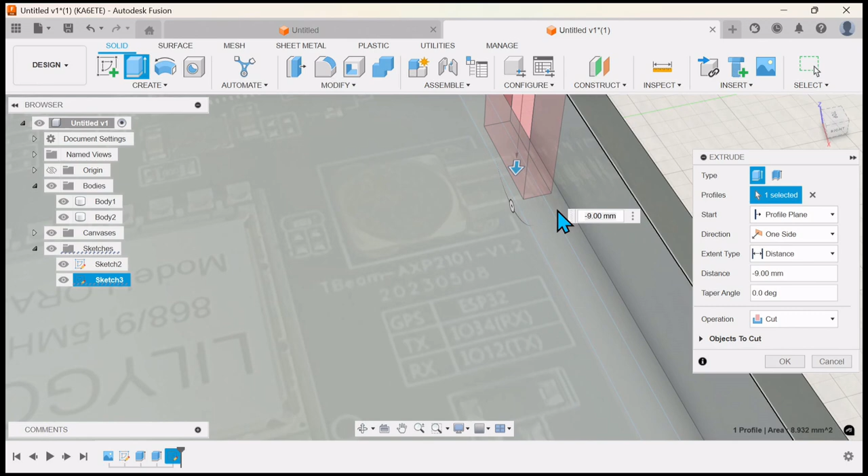Now if I go to the top and extrude that, I can go down to the bottom. And if I look on this side, you can see how I can go all the way through if I wanted, which I don't want to. I only want to go down to the bottom of this feet, or the bottom of the wall.

On the right side, if you look at extent type, I can go distance, object, or all. If I go to object and say I select that bottom plane right there, that extrusion is always going to go to that surface. I can change the thickness of everything, change the height of the wall, and that extrusion is always going to go to the bottom, no matter what I do to anything else. It's adding a constraint without adding a constraint.

Where now, because that SMA connector's there, whenever I make the top for it, I'll just add an extrusion that'll come out, even though the thicknesses are off, and there probably wouldn't be, because that SMA is going to come out actually above that. I think it's thicker than 5 millimeters.

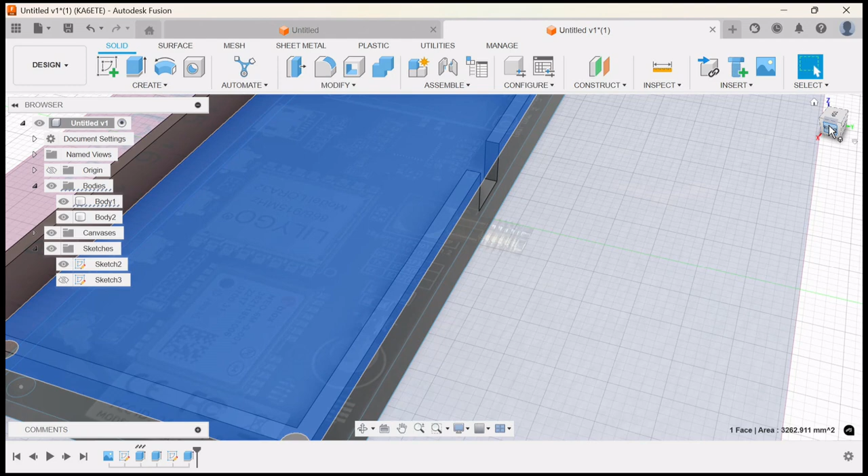But now say I want to go over here, because that's a slot, but I want to add holes for the micro USB. Actually, we can change that now, change this to where it would be more realistic because of the size of that. Let me change that down to where it would be more realistic. Okay, there.

But see how I changed the bottom thickness, and that slot went down with it. So now whenever I make the top, I can add in a little tab that'll cover that hole up, to make it a solid.

I could go as far as adding, if I go here before we do the other holes, to where I could add a fillet to that. But because there is no shortcut key for it, oops, S, and if I started typing fillet, if it wasn't in there, start typing in fillet, it comes up in the quick aspect.

Now if I select that, one nice thing with Fusion, also some of the other CAD programs do it too, it'll let me select a line through an object. It knows what I'm trying to point at, or if I move the cursor over that, it knows I'm trying to select the other side of that, or I can... oh, that's why.

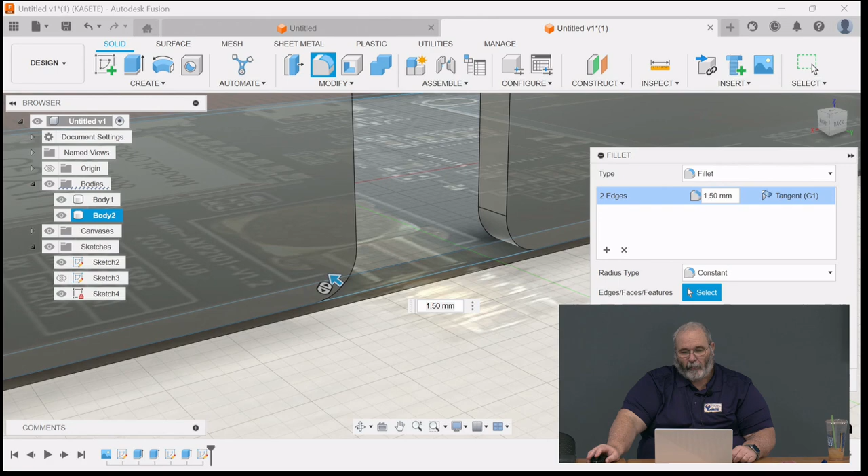Cancel that. I went down too far. That was only 5 millimeters and I went down too far, so let me move that down. I thought I completely removed the bottom.

So now if I select those two, because that's a single object, I can make that into a radius. Two edges at 1.5 millimeters.

So it's actually, I don't know what the distance was, but if I go 2.7, is that... 2.8, 2.9, close enough to a full circle.

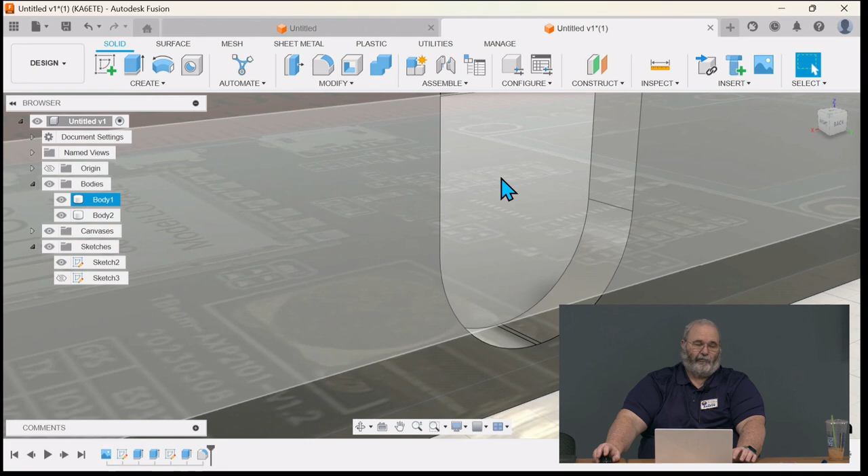Now with that being a half radius there, whenever I can add a radius or fillets to the top portion, to add a radius to where it'll be a circle and encapsulate the SMA connector.

Now if I go to this side to start creating the openings for the 3 buttons and the micro USB connection, I want them to be past the holes that go through the side, and not a slot coming down.

So if I select that side and then create sketch, it makes it a little bit hard with the dimension. If I had a picture of the side, I can put the picture on the side to give me the holes, or I can just do this. Just remember that I'm drawing on this one. Any drawing I make is going to be on this surface right here.

So I know my micro USB power connector is right here. I can do a small thing to where right there I'm at the bottom of the drawing. I know I'm going to be up from that, so I'll start up from there. This is where constraints help, because you can automatically move it up from the bottom using a constraint. I know the opening I need for the micro mini USB.

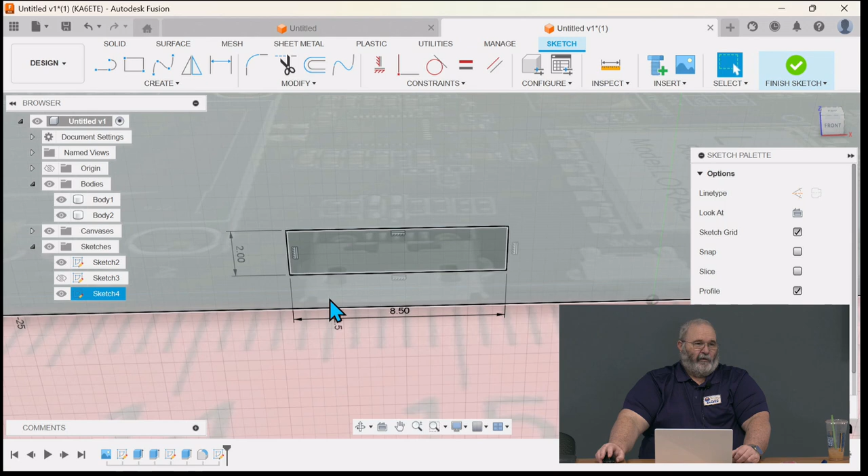I want to say they're 8 millimeter, 8.5. We'll do 8.5 millimeter by 2 millimeter opening. But because I know the bottom surface is 1.5 millimeters thick, I've got to be at least 1.5 millimeters up from the bottom before I can cut through to the other side.

So to use the constraint, I can use the dimension there and dimension there. Well, I guess lucky at 1.56, but I want to move that to where it sits directly on the bottom. Or actually I have to allow for the 3 millimeter standoff, so I'd need to go 4.5 millimeters from the bottom surface to allow for everything. So I can go 4.5 millimeter, and that will automatically move that opening up to the level I need it.

Same with the buttons, they're in a parallel plane with the micro USB, just different sizes. So I can add another small box right there. We'll just call them 4.5 millimeter by 1.5 millimeter.

But I need to do the same thing to make sure that is constrained at the same distance from the bottom. So if I do dimension there and then dimension off the bottom, 4.5 millimeter, it's going to be the distance from the bottom line of that opening, which is what you're going to be working off of, not the top line. So remember what line you're constraining to that distance.

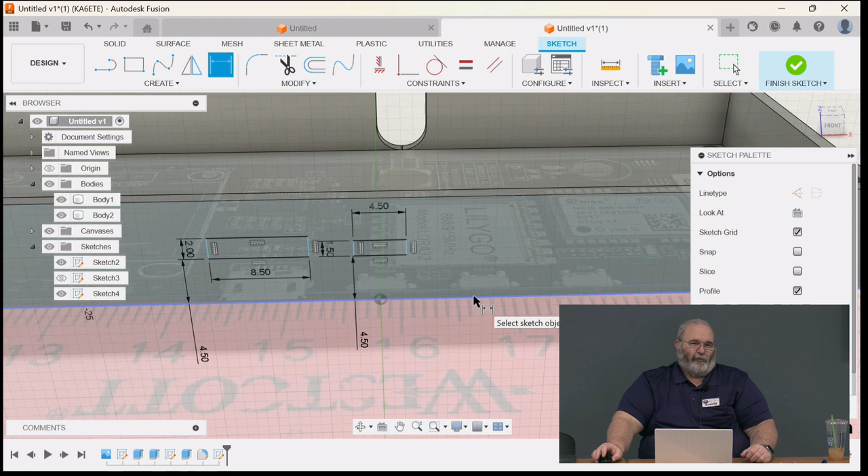Or you want to try and do stuff with, let's explain, you want to try and not over constrain your parts, but you need to constrain the important aspects of it. Fine line between what is important and what isn't. Button placement is important. Hole placement to mount it is important. Everything else is not important. Features that can be moved later.

There is, if you can find them. So I use SolidWorks, and there are features that you can, like you can make a sketch for a commonly used item, and then save that as a reference, and then just pull that sketch in on whatever plane or whatever surface. But it is a more advanced feature, and there's a lot of gotchas with doing that as far as where your origins are and where your planes are with it.

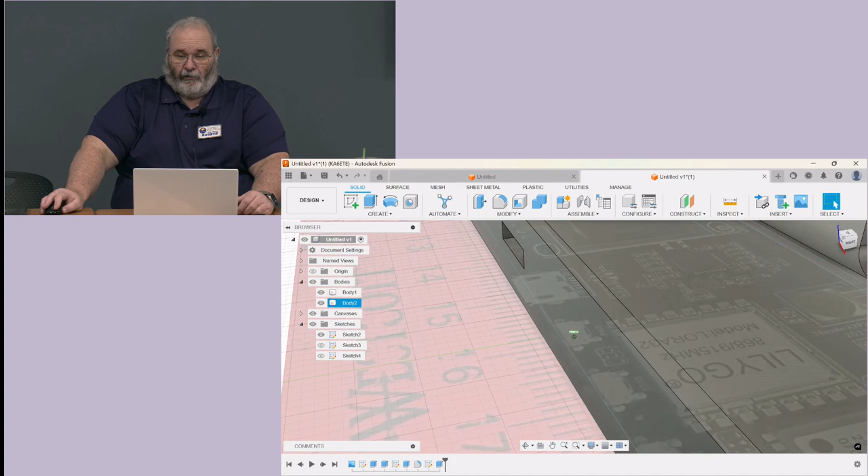Whenever you have a drawing and you go through it, for some reason it automatically hides your sketch. If you go to sketches, you can re-enable it so you can see it again if your sketch disappears, which will be in the menu on the left-hand side between your sketches and canvases.

Now I'm going to take this one, and instead of doing anything, I'm just going to do it a certain value because I know the wall is 2 millimeters thick. I'm going to go 4 millimeters thick, thinking that's going to always be there for me, no matter what I do to the outside feature.

Now on this one that is not constrained in any way, I will do this one for all, but I'm going to go the opposite direction of all. Just to show the 3 different ways - all should always give you, no matter what happens to this inner wall, the extrusion or removal should always be there.

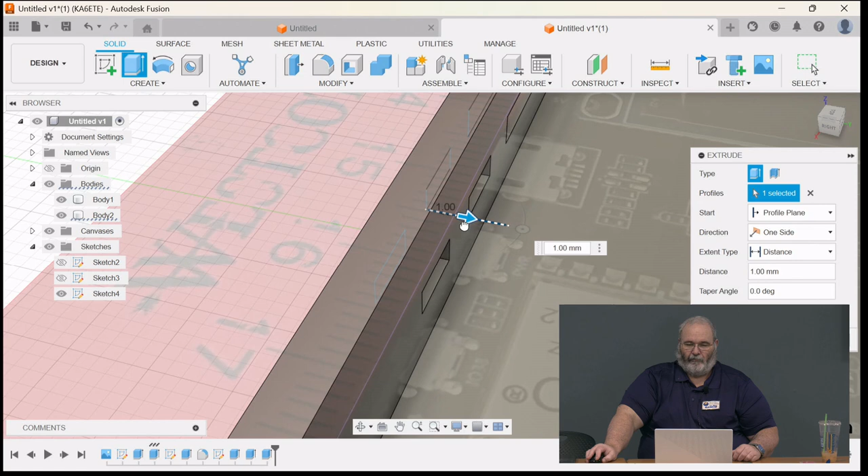Now say I want to make this wall thicker for some reason, and I start coming in - oh, there's 1 millimeter, there's 2, 3, that's always there, along with all of them. If I go this wall and extrude that...

That's strange that happened, that shouldn't have. Because this center cutout was only 4 millimeters, so it should have only allowed it to go in 4 millimeters and stopped - longer, by removing that plane, it actually made that hole thicker too, because that was there.

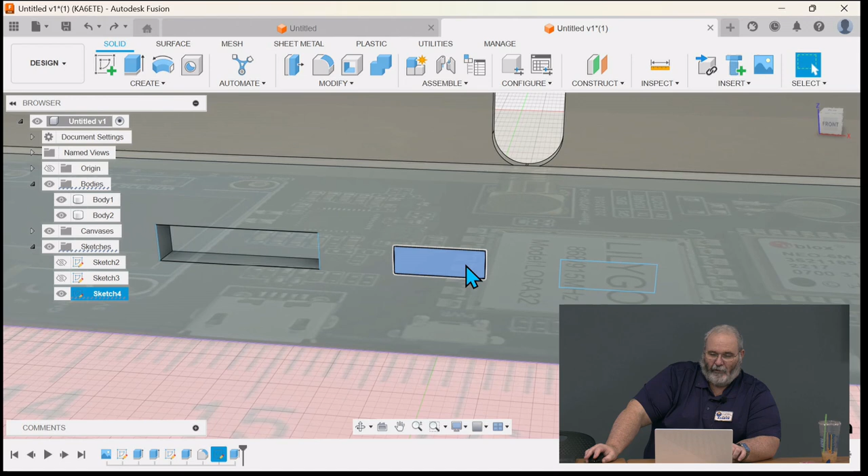I only want it to go a certain distance - wall thickness is 2 millimeters. Enter. Well, that should only give me... okay, figures it's not working right whenever I want it to.

But technically, you always want to extrude all or extrude to a feature. That way you're guaranteed to be there. Technically, if this is only extruded to a dimension, it's only going to allow it to go to that dimension and then automatically close off at that distance.

Let's always make it - I wish you could set it as default to always be on to object. I always select object because I know I always want it to go to the inside of that wall, and I want it to cut.

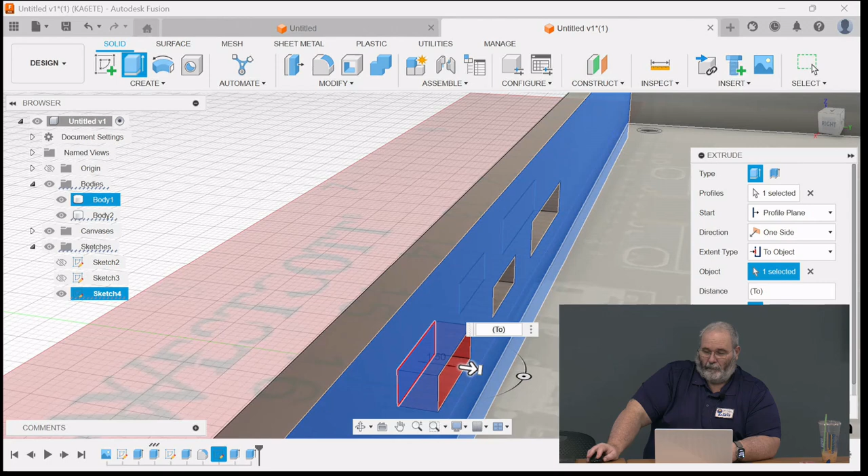Say if I'm doing this and I want this to be - anytime you extrude it, default is it adds on to that body. So if I don't want it to join, I want to make a new body out of that extrusion. I change the operation to new body and click OK. Now that makes its own body there, so I can add it and remove it. I can select that body, move it around, depending on what you're doing.

Could use it for a new part, a new aspect - like with these being buttons, if I extrude it as a new body to make the button feature that'll be recessed in there, I could extrude it once into a new body, duplicate it for the rest of the buttons because I know all the buttons are going to be the same dimensions.

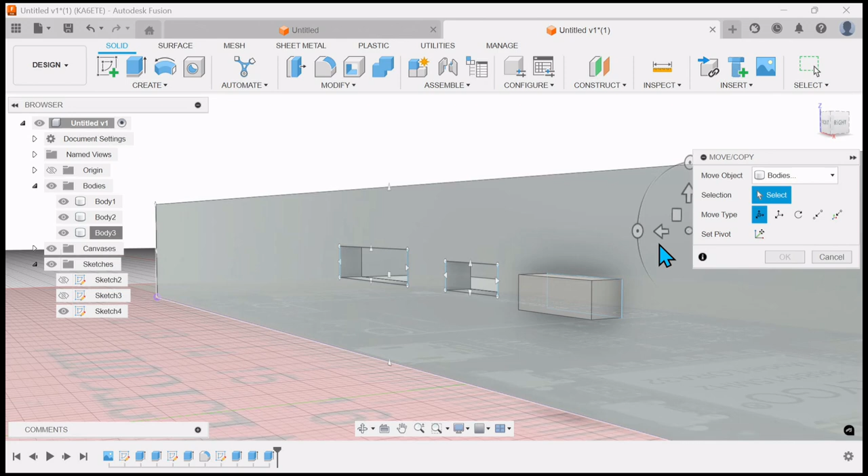So now I could take this feature and say I want to move that away. Anytime you want to move or copy something, right now it's only going to want to move that face of the object. If I change it to the body of that object, I can move that body directly out. I should have hit OK instead of cancel. Body, move that.

Now if I extrude that the opposite direction, profile plane, distance to object. Now I know this individual body is the exact same dimensions as that hole, which would be perfect for a button size.

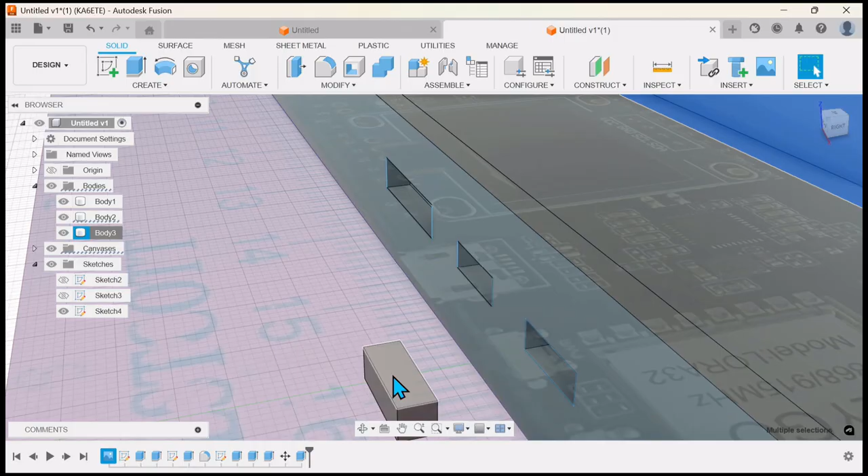Now I can duplicate that for this hole over there also. You can do that because the extrusion where you created that button, you did it as a body as opposed to as a join. And since it's a body, it can be separated from the rest of the part. Each part that's not joined is its own body.

You can go over here, I can change, like this would be considered the main body, so I could change that to main body. With this individual button that I created, I could change that to button 1, and then I can create a duplicate of that for the other one and name that button 2.

You can change the name of each body part, which makes it easier when you start building more complex stuff, and easier when you're going through with each body. Instead of referring to body 1, body 2, body 3, you want your main body or main feature or enclosure, and then each individual part that attaches to it to have its own individual name.

Now, if I wanted to, you can always join two body parts into one feature if you wanted to. That's under the modify tab, up here, press pull or quick button Q, fillet F. It's another place where you can learn what shortcut keys are for different features.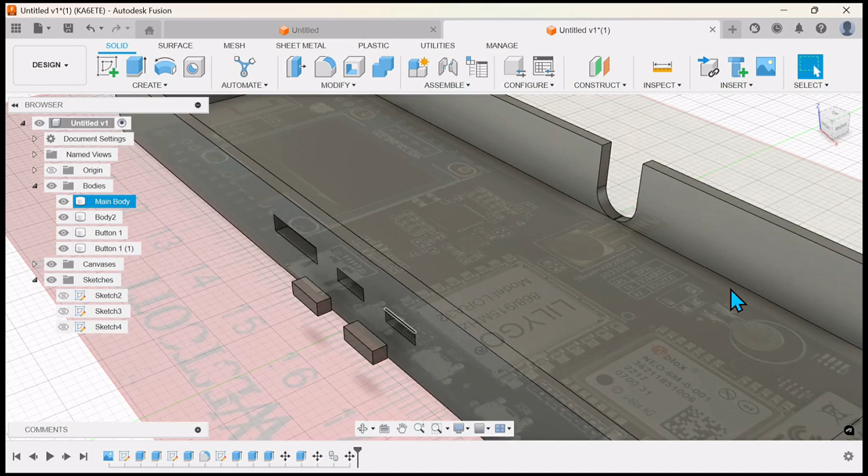Now, if I want to place this item back into that hole, but line it up perfectly without having to fine tune it by trying to move it manually, if I select that line, let me do the search and then do align, it'll let me do that.

And object bodies, I want to take this line right there at the bottom corner and I want to move it. I have to reselect. What is going on here? No, let me remove that. I want to take that line and align it to that line. Then click OK, and it automatically moves that button there while maintaining that they're two separate body features.

Where I can hide it or re-enable it. And that will always stay aligned right there.

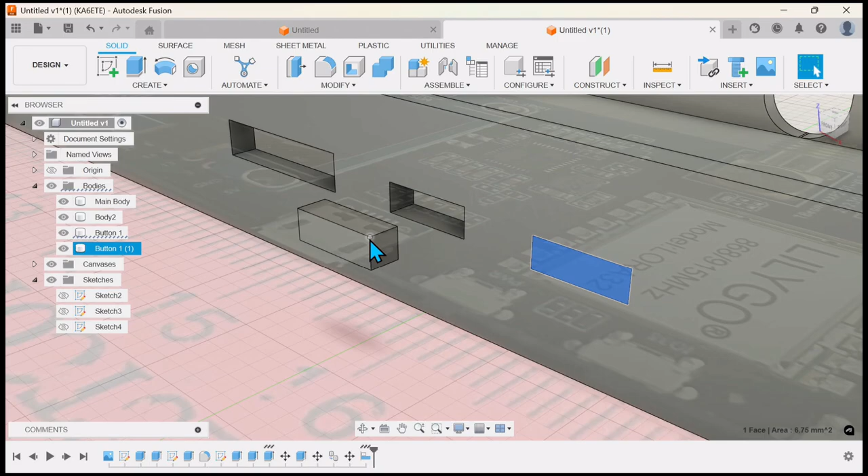How you made the button and slid it back in there. So will you actually print it like that and you'll have two little pieces of plastic, or a little piece of plastic in that hole? Or do you have to make a tolerance in there around it? I mean, how do you actually make that button? Because the one on the left is hanging out in space and then it's not going to be printed, right?

You can, it varies depending on your experience level. You can print them in place with the tolerances to where they can print in place and work perfectly fine. In order to get the button itself, there are additional features that you're going to have to add to it, because that itself isn't going to press the button on the circuit board. That button is actually indented some, so I'm going to have to put a little nub on the back of each button to allow you to press the button and everything else.

Yeah, it'll have to be adjusted slightly to allow it to print in place and also be a functional button. That comes with experience and preparation in setting up your printer at home.

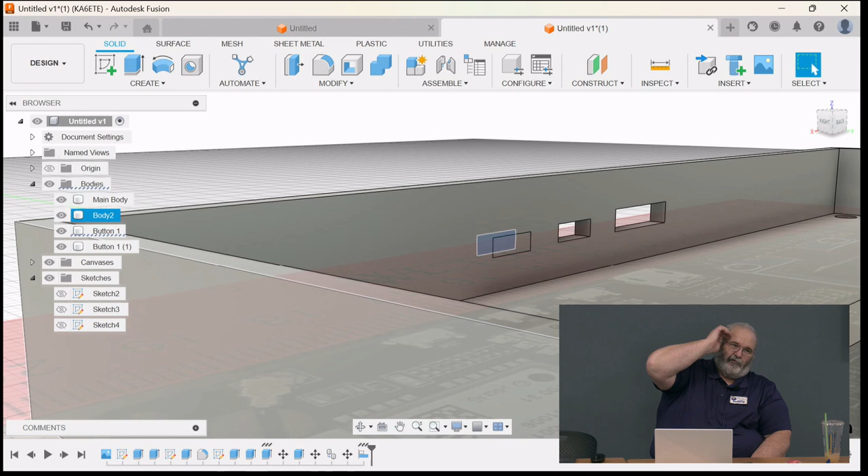Select source, I don't have any on this. I don't have any derived files, but it's pretty much the same. Different libraries where you want to insert different features, and different manufacturing parts.

I know the fasteners component, that was one someone was asking about, where if I wanted to insert a component into this drawing... wrong ones there.

I use this for more than 3D printed stuff. I insert that part into here. So anything you've created on here, you can insert the full file into it. So if you've created the part once, you don't have to do it again if you want to add it to a box. Like this is a part that I did.

Let me hide that stuff so we can see the canvas. This is for a storage compartment I made for storing hot ends for one of my printers. I made this box, and this is just a divider to set inside another storage box to keep everything organized. I designed each one of the hot ends to do an exact match for each one.

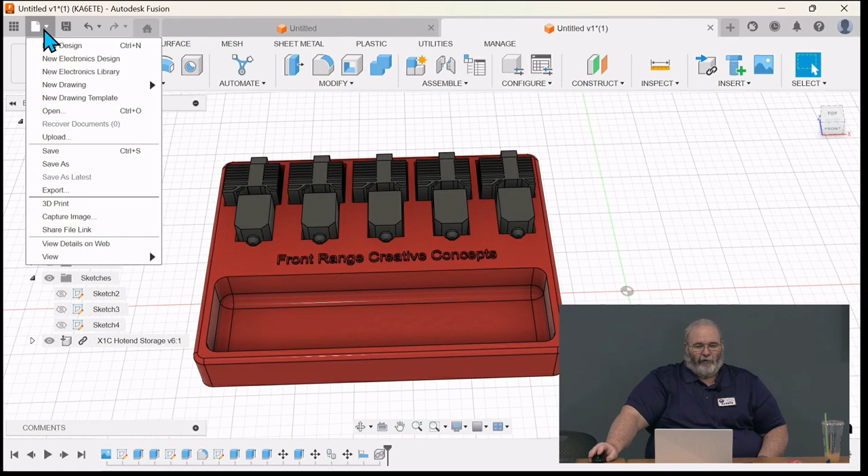Then you start dealing with other stuff, let me see if I can find it on here... and this one... oh wait a minute, I think I just seen it with... okay, any day now.

If you haven't noticed, 3D modeling is a very RAM hungry operation. So I don't recommend having more than one 3D modeling file open at a time, where I currently have 3. Tends to go slower.

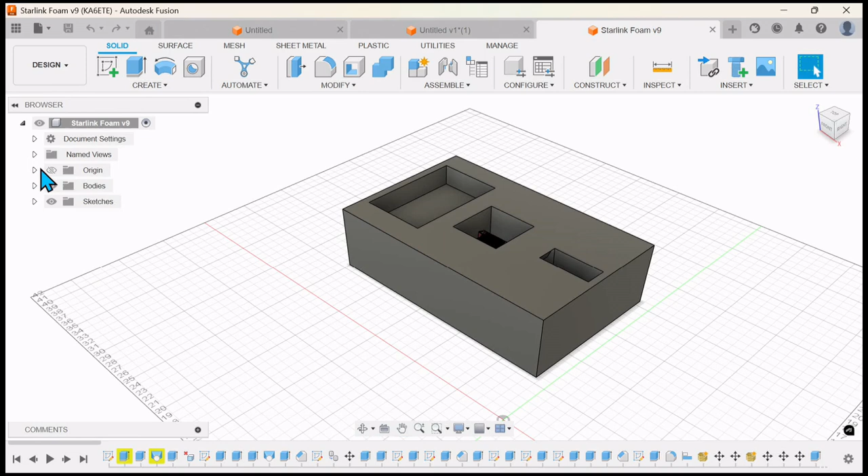Inserting objects that were from other things - this is one I did recently for the Starlink, where these are the mesh files for the Starlink that I found online directly from Starlink, giving me each of the parts with the mesh file. I essentially created a solid block, then selected the box and used this as a tool to cut away from the solid block, and divided the block into separate pieces, then divided the block on a profile plane.

To where now everything is... let me move this piece up, fits perfectly inside there, so now you can have 2 separate pieces, use a CNC to cut it out, and the dimensional accuracy is there because it was direct from the manufacturer on the sizes, dimensions, angles and everything.

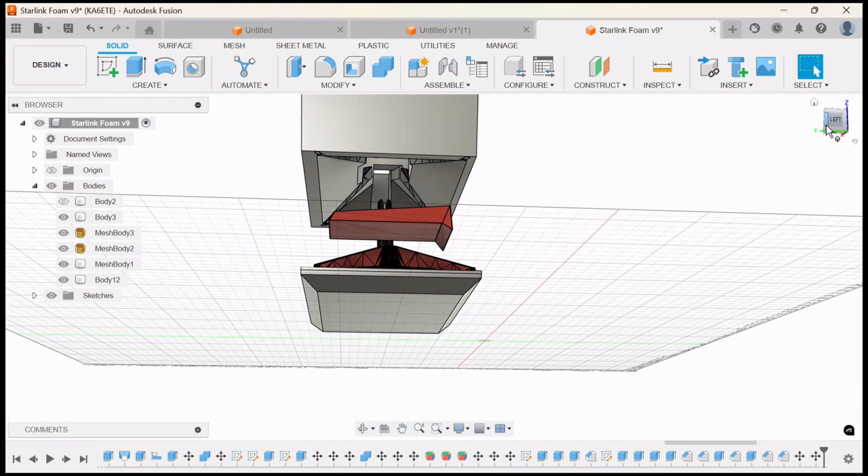This also shows the differences between a mesh file and a STEP file or CAD. Whenever something's converted to a mesh file, which gives you dimensional accuracy, each one of these individual triangles is a plane, so it doesn't create a curve, it creates triangles to mimic a curve. If you import a mesh file, it imports the surface of each plane for the extrusion, and when you get into tight radiuses like this, there are a lot of individual triangles to deal with in mesh files.

Invest in a very powerful computer because mesh files get very power hungry, GPU hungry and CPU hungry. Some in here are familiar with different graphics cards, where even the NVIDIA 4090 Ti's and 5090s have issues keeping up with some mesh files, just because of how they're designed and laid out - each individual face has its own math calculations to scale everything and keep measurements consistent. It's computing a lot more than you'd think.

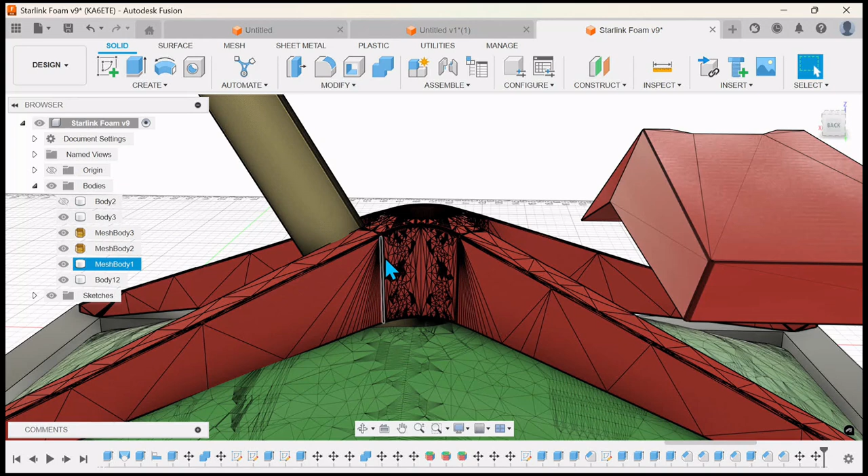I'll also add, if you're speccing out a computer specifically for 3D modeling, take a look at the software's recommendations for video cards and computer specs. SolidWorks, and I'm sure Autodesk is the same way, has video cards and computer models and processors and RAM specs that they've tested to work with that software, along with specific driver versions of that hardware.

So if you're designing a PC for this stuff, go with the software's recommendations rather than just throwing high-end stuff in, because there's a good chance you'll run into driver incompatibilities and won't get the performance out of a high-end video card that you would with something designed for that software. Even with Intel CPUs, a lot of times the older i5s and i7s, the 9600s, work better at 3D modeling than some of the newer i9s, the 12900s.

A lot of times you can get older hardware that works better with newer software, just because of the CPU and GPU capacities of video cards and CPUs. Some of the older video cards, like the old 2070s, do better at basic 3D graphic functions than some of the newer versions like the NVIDIA 4060s and 4070s. Definitely look at the specifications for manufacturers and what they recommend.

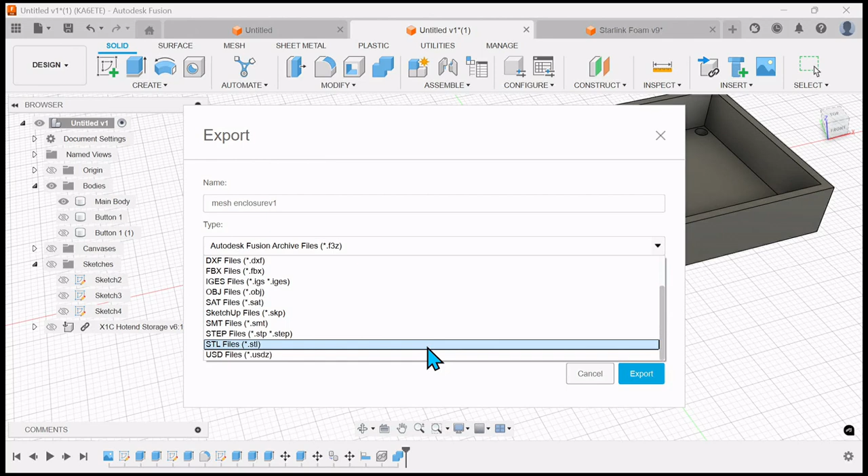I always export as STL. If you start getting into CNC, then you'll start dealing with some of the other file types, like DXF and step files. But export as an STL, decide where you want to export it to, I'll just put it in its own folder, and hit export. The nice thing is STL files are smaller for the most part, so they export very quickly.

Now I have that exported out of there. If I go to the file location where it was exported to and open it from there, you can see it was exported as STL.

It'll open in the slicer software. Because I use Bambu printers, their slicing software is pretty much as good as any of the other ones and easy to use. You can see it brought the file directly into there. Let me change the color of the filament so it's easier to see. You can see it brought it directly in here to where I can do that now.

Now I can actually start the print from here if I wanted to. That's how you export and import into a file and then change the settings. We covered all the settings for the slicer last March.

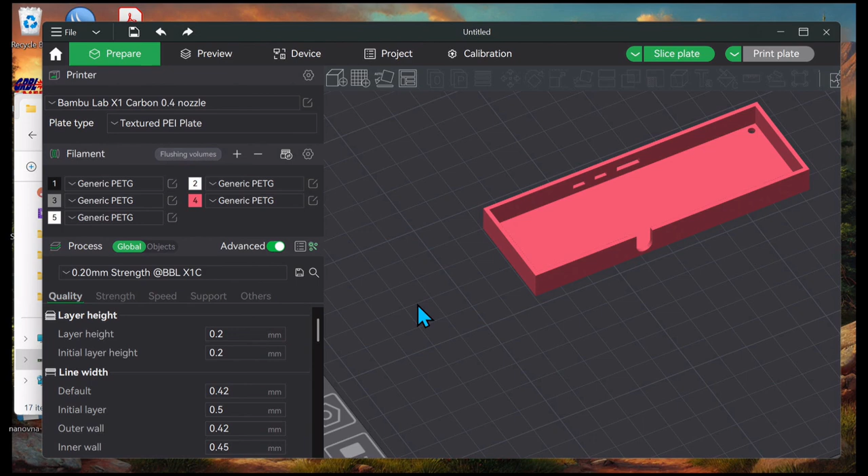Slice the plate. Close out of that. If you look at this, total time for this to print is 30 minutes and 9 seconds. Prepare time for the printer is 8 minutes and 27 seconds. The cost of material to print this is 35 cents. So it becomes very inexpensive to make parts and replacement parts.

Change of filament. That's another advantage you get when you have a multi-color printer: you can select colors and everything else direct.

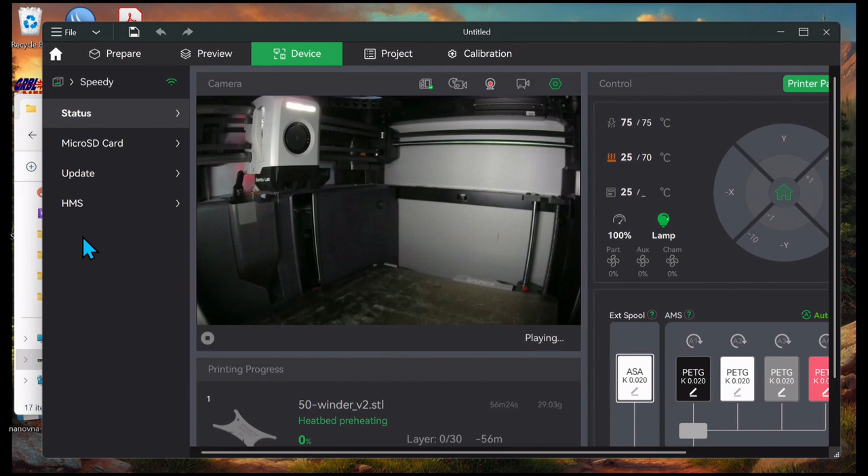Where in this whole process do you discover that this print is a total disaster, that there is something unprintable, or you just made a mistake in the design somewhere and it's not able to actually print that object?

A lot of it comes from experience. If you're designing and printing stuff, I'd recommend, on your first design, going through—obviously this was a pretty basic design—but you can go through after you slice it in the software and inspect each individual layer of the print. With this being basic, there's a total of 30 layers, but I can go through and see each individual layer of that. What you'll notice on stuff that's becoming unprintable is you might get into a tight radius like this, to where this line might stop back here and then start back up over here because the taper gets too close together for the 3D printer to print.

That can be addressed either by a design change or by changing the nozzle size, to where you can go down to a 0.1 millimeter nozzle, which allows you to give really tight angles and tolerances, but takes extremely long to print.

So what are you looking for in this process? Are you looking for lines that are not continuous, or what is it that you're looking for? Incomplete lines, or lines that don't continue.

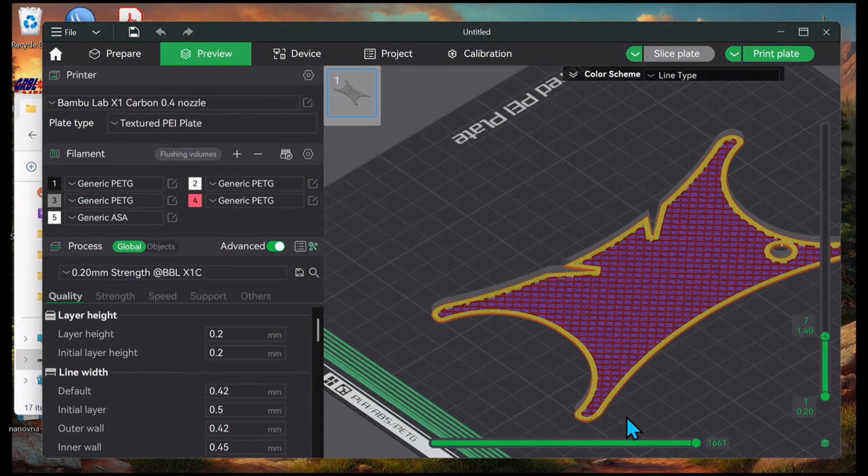Main thing you're looking for is incomplete lines, gaps in the exterior wall, stuff that can't be printed. This is not a good print to show that on because it's so basic and there's nothing to it—it's just a flat piece of plastic. But this would be a key point if you have stuff with tight internal angles: checking there to make sure it's complete and you have enough wall thickness to allow for it.

Enough wall thickness, is it like 5 passes? Depends on what you have it set at. This, because I want it to be a rigid object, I have increased to 6 walls—5 internal, 1 external wall, or the outer wall shell. Depending on what you have, a lot of stuff I print will only have 2 walls because most of the rigidity comes from the internal structure.

Good thing to point out the difference: when you're in design, in Fusion 360, you're only designing the outer edge of the object—the design portion is what you want the exterior to look like. The slicing portion is what you want the internal structure to be like. The design portion deals with where you want a fillet or chamfer to add to the structure rigidity, but that's not the overall structure rigidity.